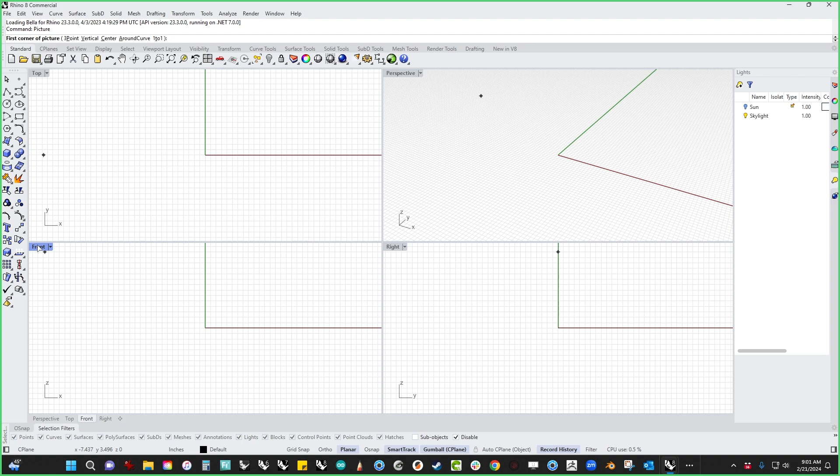So with everything that I build, if you see any of these videos along the way, we start with the picture command, and we're going to find the little sketch, and I'll work in the front view, and I'm just going to click and drag and drop this picture in the front view. And this is a sketch I did just a few minutes ago.

And what we're going to do is build this little character, and he's a little mini figure for a building set. And one of the things that bugs me about the existing things for some of these building sets is that the guys don't have any knees. So we're going to talk about how to put knees in this guy. And we might do arm articulation too. I don't know. We'll take a look at it and see if that's even mildly feasible. But if not, we're going to build a few little accessories and then talk about how to put this together.

And this character is actually kind of interesting from a Rhino 8 point of view, because it is essentially just like a clinic in push-pull. So we're gonna go ahead and talk a lot about that. We'll also use a lot of the new gumball features; there's a wire cut feature that's new on gumball in 8. There's also some solid transformation tools that we'll talk about and stuff like that. So, all right, let's get started with this.

And I brought this picture in using the picture command, and the first thing I'm going to do is just drop that on a layer by right click, and then I'm going to say change object layer. And now this lives here. I'm going to double click. I'm going to change this name to image so I know that it's there.

And then we're going to go to the material stack, and if you don't have any of these tabs down, right click down here in an open space and use show panels. You can also do that from up here, Windows panels, and that will pop open those, and then you can dock them over here.

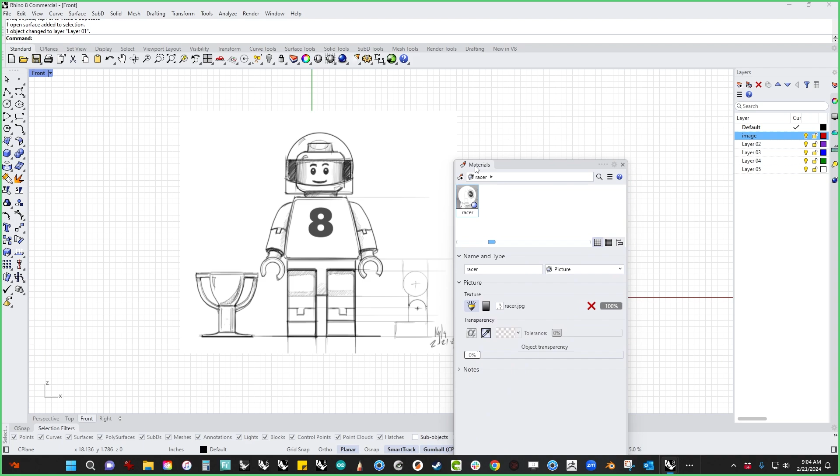If something pops up over here and it's not docked and you want it docked, and this is new for 8, if you grab it by the title bar, you can see that it will actually dock underneath the container that you had before. If you grab it by the tab, you can drag it over here and actually stick it inside another container, which allows it to stack.

So these are called containers now. The things inside are called panels, and then inside the panels can be toolbars. And so that's kind of the new way that this stuff is all organized, which is different from 7. All right, so let's take a look at this material.

So this picture frame material, this picture material comes in, and it actually creates its own material. And if we click on it, we've got some settings in here, and you can see that it's a picture material. And I'm just going to crank the transparency up a little bit so that it fades so that I can draw over it. I'm going to go back to the layer stack, and I'm just going to lock this guy. And now he's locked.

Actually, I'm going to unlock him. I'm going to center him up a little bit because this is a symmetrical dude. So I'm going to try and stick him right over the origin to make my life a little easier. I'm going to nudge him just a little bit using arrow keys, and that's mildly centered, so we'll just go ahead and drop that.

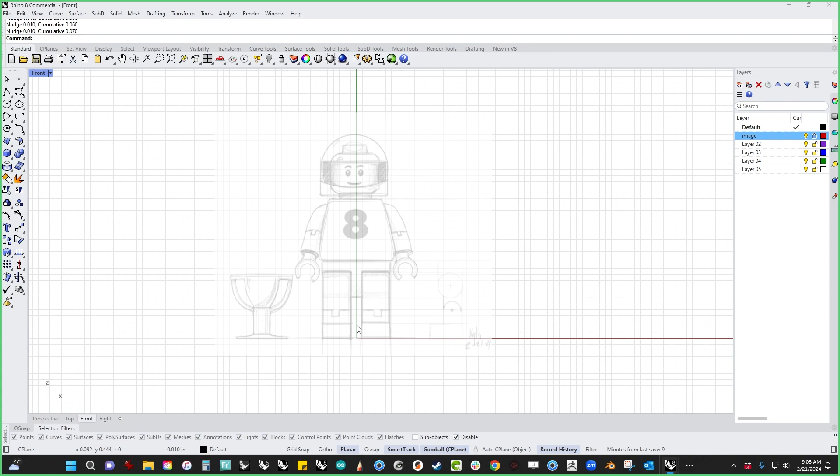Now, this guy, if we look at it, it's actually pretty simple, and the crux of this build is going to be the articulation on the knees and making sure that that actually works. And so what we're going to do is let's start with the lower body, and let's do the hard stuff first, and then we'll do the fun stuff later.

So I don't have any dimensions on this, and so I'm going to just guess. I'm not even going to try and throw dimensions on it. If you were going to build this to integrate with your own building system, no matter what it is, you would obviously take some time to figure out what the units are for all that kind of stuff. But for this demo, I'm not even going to worry about it. So I'm not going to do anything other than show the build.

So let's start with an object that's centered, and I'm going to just start with a center rectangle. I'm going to go to 0, and I'm just going to drag out a box, and that is going to be kind of the gatekeeper for my symmetry and kind of the foundation of what I'm going to build off of. And I like this for 2 reasons. One, because center boxes are easy. The other thing is, with the O-snaps on, they have midpoints and quads and edges and all that kind of stuff that are easy to snap from.

So I can easily go from the midpoint, and I can drop a line down here, and I know that that's the center of my object. The other thing is I can take this, copy paste, and I can click on this and hit 90, and then I know I've got exactly centered for the centerpiece here. I can shift control drag to sub-object select, move this down. So I've got this little T shape, and yeah, sure, I could have come up here and drawn this with a polyline, but then I would have had to pay attention to symmetry and all that kind of stuff.

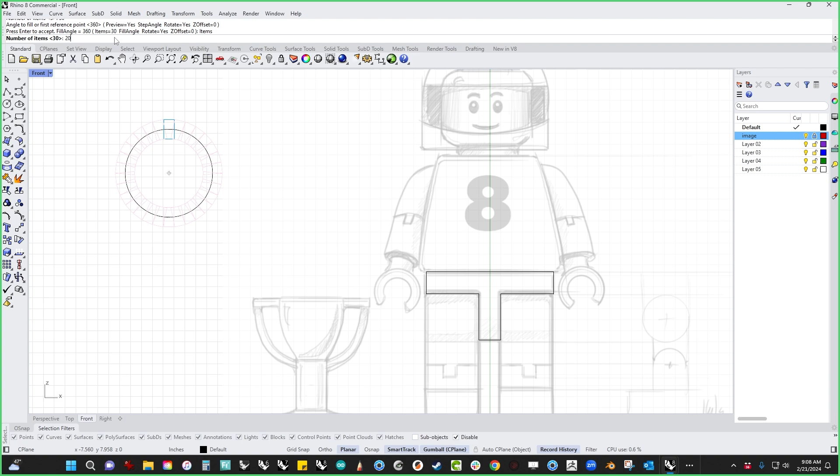Now, if we were going to do this normally, we'd have to trim. It would make us crazy, right? If we just do curve Boolean, I can either click outside and get the trace of the outside, or I can click inside and get the trace of the inside. And in this case, I want the outside. I'm going to delete all. Boop. 2 clicks, we get a gear, right? So this works for all sorts of curve stuff, and I just really want to show that every time because it's an amazing tool, and I'm always stunned at how few people actually know it exists.

So the other thing that I need to do is, because I don't have a depth dimension on this and I only have this front view, I need to kind of determine a depth.

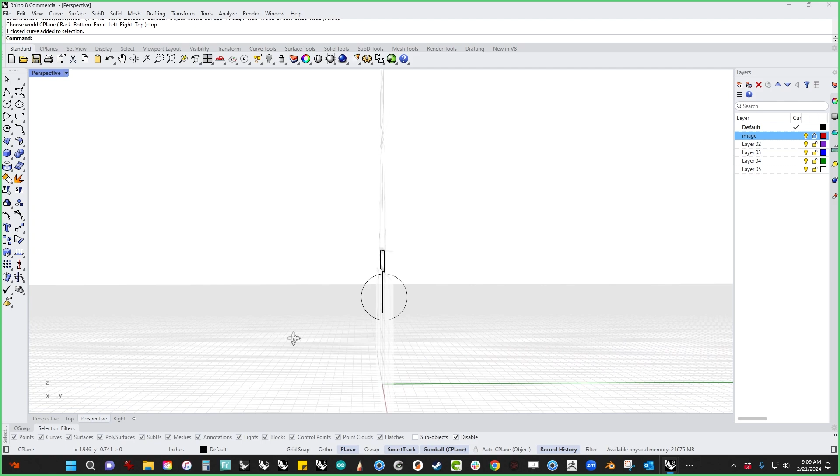And I do have a little section on the leg here, which is determined by this kind of barrel right here. And so I'm going to do a little mystery science theater modeling here, where I come up here and I'm going to just say, okay, that's about the top, that's about the bottom, right? And then if I go to the perspective view, I can click on this and I can rotate it 90 in the Z, and that's going to essentially be my depth, right? Because I don't want it to be too much deeper than that.

So what I can do is I can grab this guy and I can use gumball and I can snap it to this quad. And one of the settings that allows you to do that, if you right click in this menu ball, is this snappy dragging. And I use this all the time. I wish it was the default, but I think the default is smooth dragging. But snappy dragging allows it to respond to O-snaps. And the reason I like that is because I can drag this around in space and I can find things to snap it to. So I know that this point, because it's flat, is aligned with this quad on this thing. So I know that that thickness is correct.

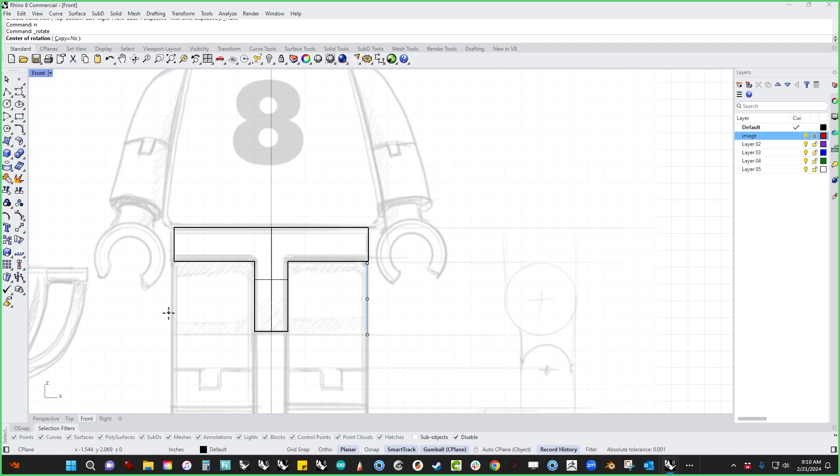And then if I grab this little menu ball down here, or this little extrude ball, I can extrude forward with O-snap, and I can snap that to the front of this. And I know that the thickness and the width of this are going to match. And I'm going to go to the right view and hope that it doesn't make me a liar. And we can see that these match. Okay? It's almost like I know what I'm doing.

All right, so then we're going to just take this barrel, or this circle, and I'm going to use the extrude dot to come out here like that, and I'm going to snap it to that, and I know that that fits right in there, right? So I'm snapping to the midpoint on this. And my edges don't align here, so I'm actually gonna shift control click this face, go to the front view. I'm gonna grab gumball, and I'm gonna use my O-snap to snap that to the end snap there. And because I'm constrained in the Z direction at this point, I know that it's only gonna go up and down, and then I know that everything is now starting to line up, right? So we're sailing here, right?

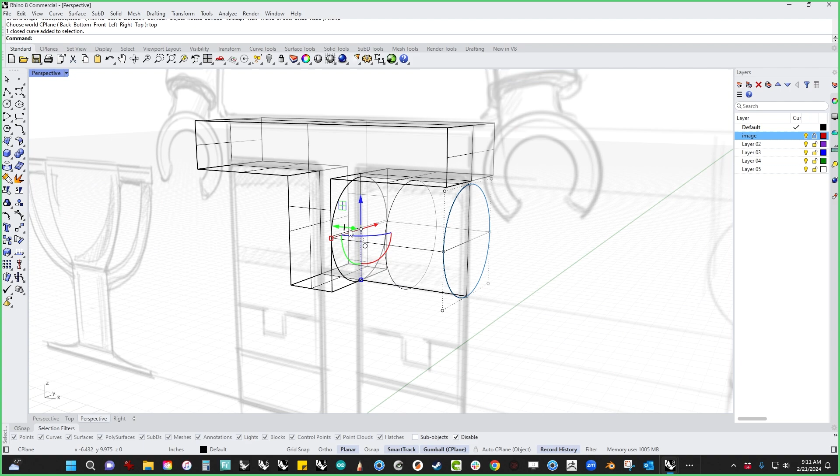And so now one of the things that I want to do is I don't want these edges on this. And what I can do is I can take this curve, which is what I used originally to make this thing, and I can move it off here like, nope, got history on it. So let's kill history. I've got a command set up for purge history, so I'm just going to move that off there, and then that can move independently. So I want this now to cut through that, but if I just shoot it through, I'm going to take a circle out of this, and I don't want that.

So I'm actually going to modify this, and I'm going to snap to the quad there, and then I'm going to snap to this quad here, and I'm going to use these two and trim the top off. Then I'm going to take this and join it. Now I'm going to use this cutter. And this is where the fun begins. So I'm going to hide this. And this cutter will go through everything it touches. So I'm going to grab this new little icon right here, and I'm going to just zing that through, and it cuts the bottom off. Okay? So it's like this wire cut that's built into Gumball, which I think is fabulous.

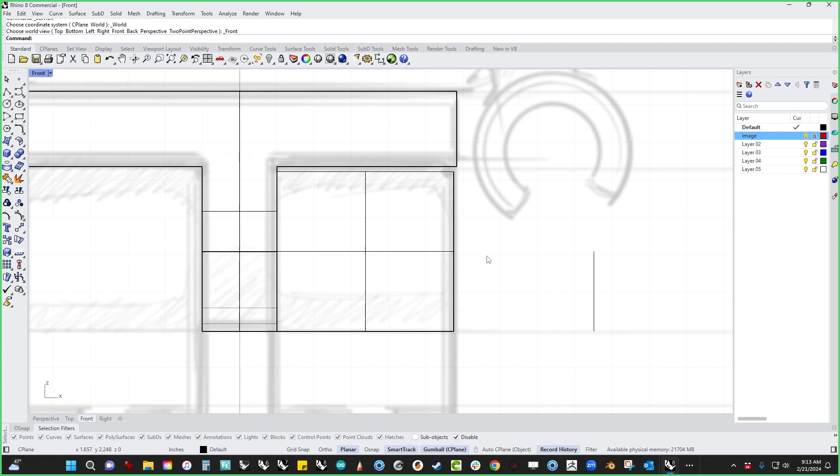That's essentially what our articulation setup is. And so if we were going to 3D print this or do anything like that, we may want to build a little bit of clearance in here. So I'm going to actually pick this thing. I'm going to double click the origin of the gumball, and I'm going to use O-snap to bring it over here, because you're going to see this little mismatch right here. I'm going to actually move that using O-snap so that that lines up, but it's also giving me just a tiny bit of clearance in here.

Okay, so I've built a little bit of clearance in here. If I was going to go 3D print this later or something like that, I would end up with something that would actually work.

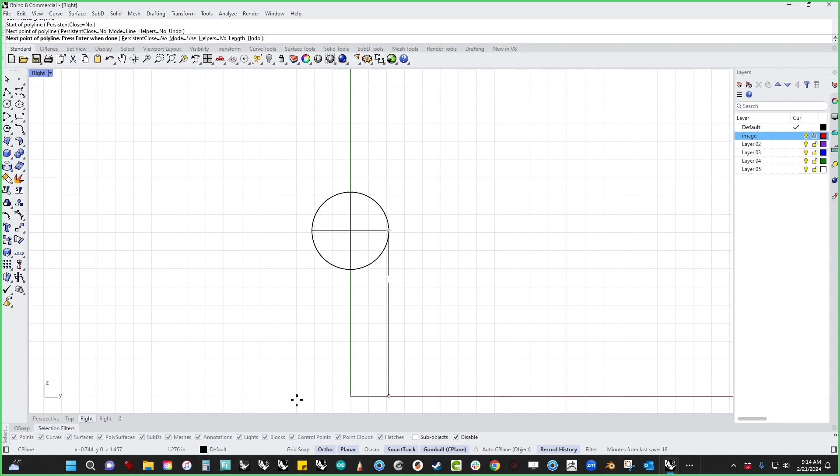So let's go to the right view, and this is our front, if I'm oriented correctly in my head. We're going to build the legs on this thing going forward. I'm going to isolate just this guy, go to the right, and let's draw the legs out. I'm going to snap to the quad, draw down to here. I can use a grid snap if I wanted to really be precise. Let's give him a decent foot so he doesn't fall over, something like that. And then I don't know how high this is supposed to be.

So I'm going to just come up here and snap there, and let's go back to the right view. And then I'm going to come up here and say, probably something like that, feels kind of footy, right? Somewhere in there. I don't want to come all the way up here, maybe just a little bit. This is a lot of eyeball science at this point, but that's how we're going to roll for today.

So now I'm going to take this, and I can use this extrude dot, and I can just use O snap to drag that out, and I've got the basis for my object.

Now, somebody's going to hit the comments and be like, you just draw the whole thing and extrude it out. Yeah, exactly, we could have done that. But I like this way because I like doing things in chunks so that everything lines up and all that kind of stuff. So you do you, that's fine, but this is kind of how I'm going to roll.

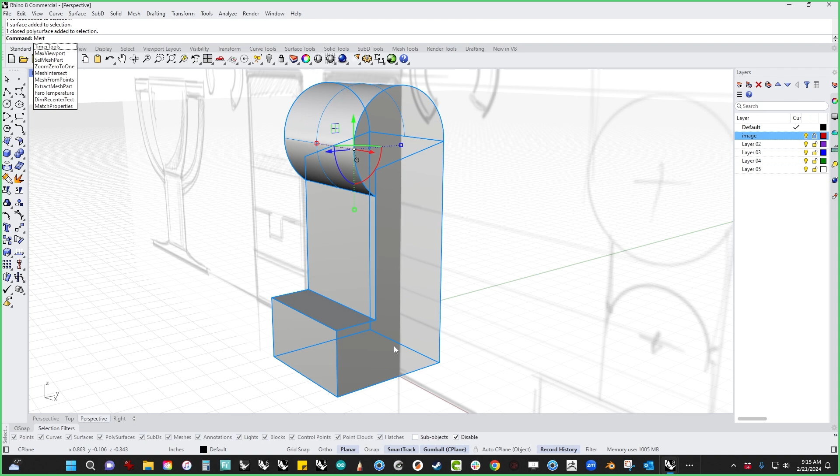We're going to go ahead and Boolean these guys together. And you can see that there's a little discontinuity on this surface. I'm going to fix that with a command called merge all coplanar faces. Boop, and then it's going to merge all that stuff up. So anything that's planar, that's got a split in it, it's going to remove the split. You can see that this curve is now just kind of incidental at this point, so I'm going to get rid of it. And we've got our leg.

Now let's look at this lower leg articulation. This articulation style is very common in any kind of action figure build or anything like that. So what we want to do is we need to build what's called a T-slot in order for it to be able to rotate, but it has to rotate around a circle.

So let's go to the right, let's figure out where that circle is going to be. I'm going to use a 2-point circle for that, and I'm just going to snap from edge to edge. I'm not even going to worry about where the placement is, I'm just going to place it in space so that it's located about there. Now you can see where the center of the circle is, right, by the arrow. So I'm just going to drag that up until it vaguely lines up with the sketch.

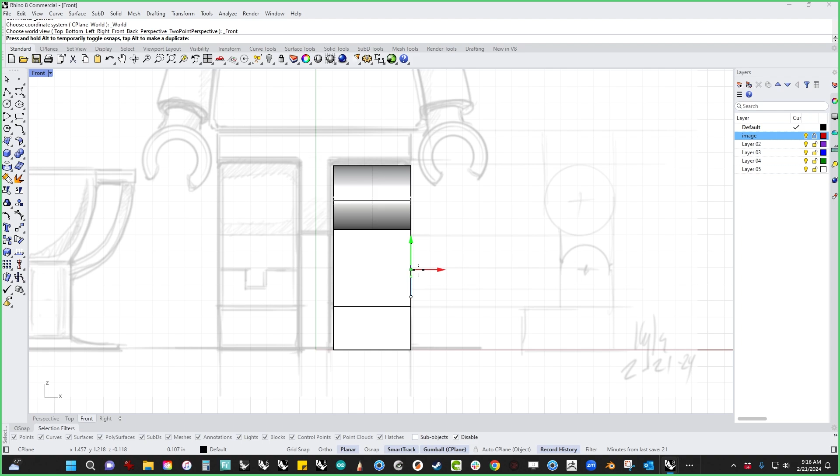And I always say when you've got a sketch, especially one that I've drawn, to use it as a guideline and not a law. You need to look at it, because you can lie, cheat, and steal in a sketch. The model is where all of those lying, cheating, and stealings become available for view. So we want to make sure that we are being honest about how this thing is going to go. Now, I have the knee drawn with the circle part on the exterior, which is fine, I think that's okay.

So what I'm going to do is I'm actually going to split this thing in half using this cut. I'm just going to run this through there, and it made a hole, which is not necessarily what I wanted. So what I want to do instead is the same thing I did before, where I want to make this into a cutter, and I'm going to just split this in half like this.

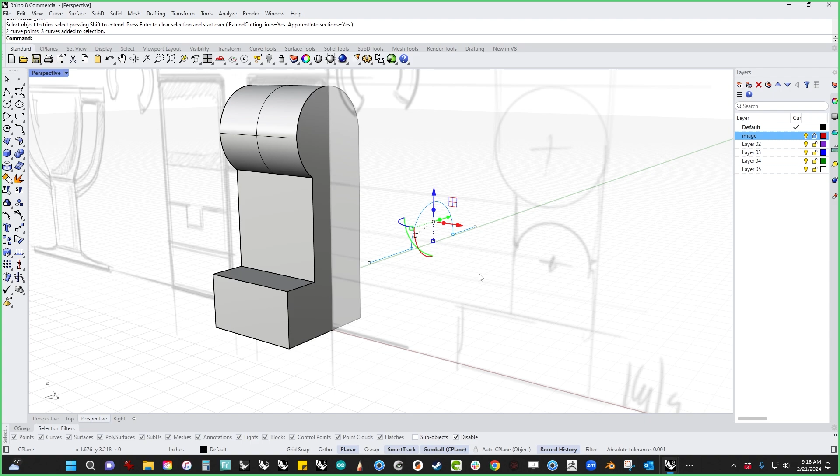I'm going to join that, and use this as a cutter, and just slice that through there. The cool thing about this is now it has a center point available, which means if I set my gumball to that point, I can use this and rotate it.

I can see what this is going to do. Right now we can already see that if we go into a 90-degree position, he's going to kick himself in the center parts, so to keep it from being rude, I'm going to Control Shift drag this face and just move it.

Now that's clearanced, and it's going to work. So I know the foot is going to actually work, but I need to make sure I have some clearance. So let's undo, let's do this, let's redo that, let's go back to the front view.

Any questions so far? Everybody still with me? I'm going to just use the Shift key to spin that down. Question? Okay, feel free to jump in, feel free to hit the chat.

Is there any way of enlarging your screen? That is as big as the screen is going to go, that's full screen for me.

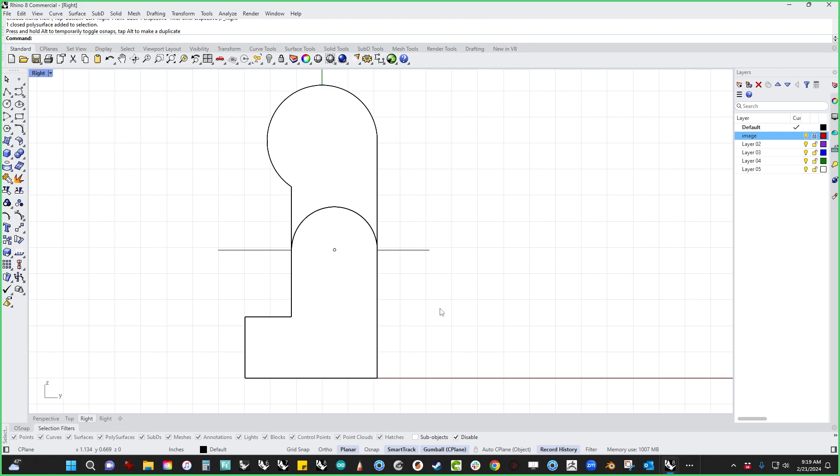So this guy is essentially going to be the outsides of my T-slot, and I'm going to isolate that. This is going to have a slot dug out of it, so I'm going to start up here.

Let's do the same trick as before, start with a center since I know there's a center point right here, and drag a box out, we'll call it something like that. If I was doing this for a client, I'd go through and measure all this stuff, but we don't have time for that here. So I'm going to take that and zing it through and cut it.

That's going to make my cut. So now I bring everything back, and I need to actually keep that piece, because it needs to go with the top. Let's undo that, and let's take that, because I want to keep that piece.

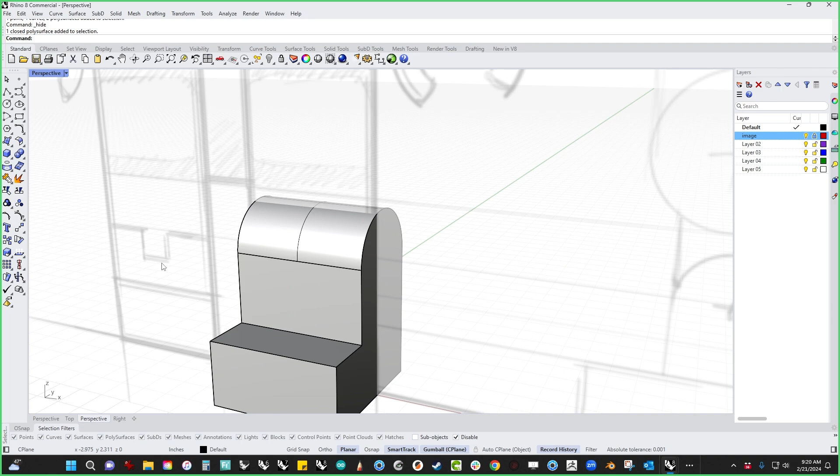So let's do this and this, isolate that, and let's split this actually. Let's do a wire cut, but we're going to keep this. This is a situation where we want to use the wire cut command, so we're going to cut through here, cut this object, go all the way through it, and we are going to keep all.

Now, the thing about keeping all—oh, they fixed that. It used to be that it would make a copy of the old thing, which wasn't necessarily what you wanted, so that was a bit of a problem. But it looks like that's working now. The keep all just keeps the individual pieces, so that's going to work.

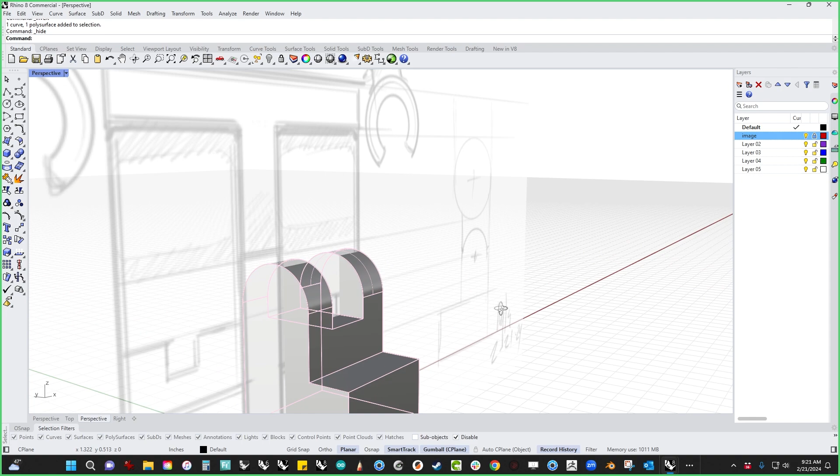This is pretty much what we need to do, except we actually need a circle at the bottom of this in order for that to be able to spin. So I'm going to do the same thing again, a 2-point circle, and snap it edge to edge. And it looks like it's, there we go.

Then I'm going to cut from that side to this side, and it's going to dig that out. See that? This is all just gumball. We haven't used any tools out of here, right? We've used the box and gumball and a couple of circles, and we're sailing here.

So now I'm going to take this, make it just a little bit smaller so that we have some clearance, and then I'm going to extrude it, and that's going to make the plug that I'm going to add to the leg.

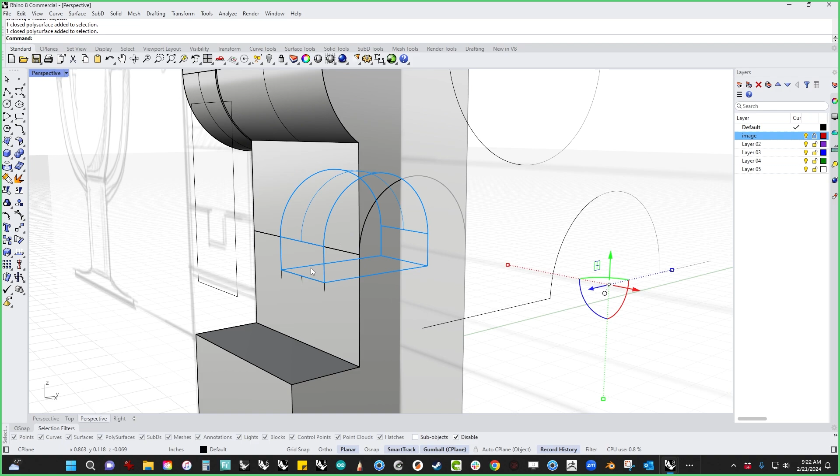To go up here like this. Now, I've made myself a little bit of a mess here, so let's fix that. I'm going to Control-Shift-Click-Delete, open that up, and use an edge surf, and just put that back together: join, cap, merge all coplanar faces, and now we're kind of back in business.

Now this guy, it's great that he's set up like this, but I don't like this little gap in here. So let's fix that, using a midpoint snap, and I'm going to draw up like this using Smart Track to line that up, and draw a box in there. I'll take that box and extrude using O-snap.

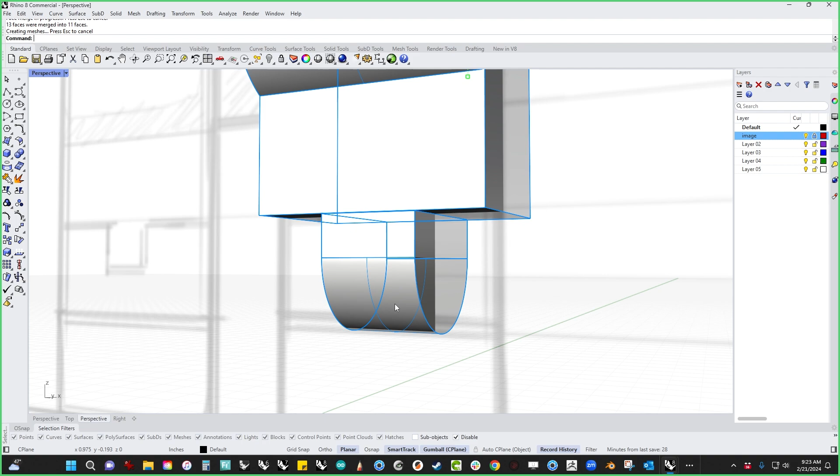Boolean these together. Boolean this together. Merge all coplanar faces, and I've got the basics.

Now let's take a look and see what we did. So I jumped the gun a little bit here. I actually needed that opening, but I think I want a little bit of clearance in it. So what I'm going to do is grab this, set my gumball here, and then scale it, holding down Shift just a little bit. Now I've got a little bit of clearance in there.

So now I can take this, and let's isolate those two, and cut snapping to there, and it didn't do it. So it needed to go all the way through. So what I'm going to do is actually make myself a little Boolean cutter, and I'm going to do that by just adding some pieces in here.

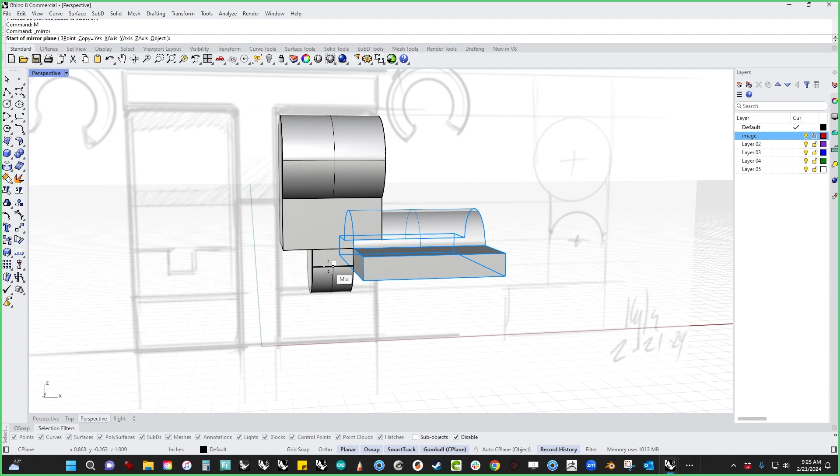And let's go to the right view. I'm going to join this, and then do a little extrusion, and then mirror this. And I've got those things the way I want them.

So now I'm just going to do a Boolean subtract on these, and that should have gotten rid of all that stuff.

All right, now I've got a little step here. Maybe I want to get rid of that, maybe I don't. If I do, I can just draw a little line and cut that. In fact, let's do that.

I don't like that little step in there. It goes from here to here. So let's take that and just zing that off.

And let's do the same thing on the back. We're just using the cut command on the gumball to do that.

You see how few tools I'm using? This is really kind of luxurious to be able to just sail through this stuff.

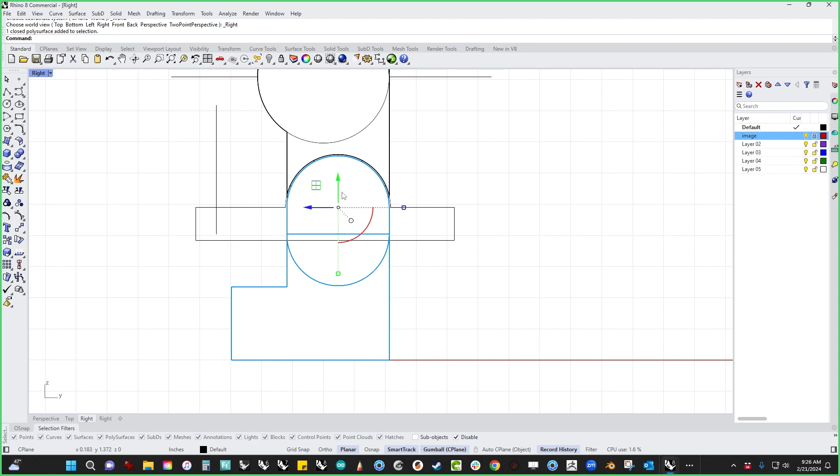Now, if I test this, if I go to the right-hand view, and if my gumball is still set on the rotational center, but if it wasn't, I could certainly just change it to that. But now I can see that he makes a 90-degree turn, and he's kind of colliding with the front of this thing. So let's fix that.

So let's just drag from here to here. We're going to make a cut out of that. I'm going to put this back where I found it. Come now, this way. There we go. And let's fix that part.

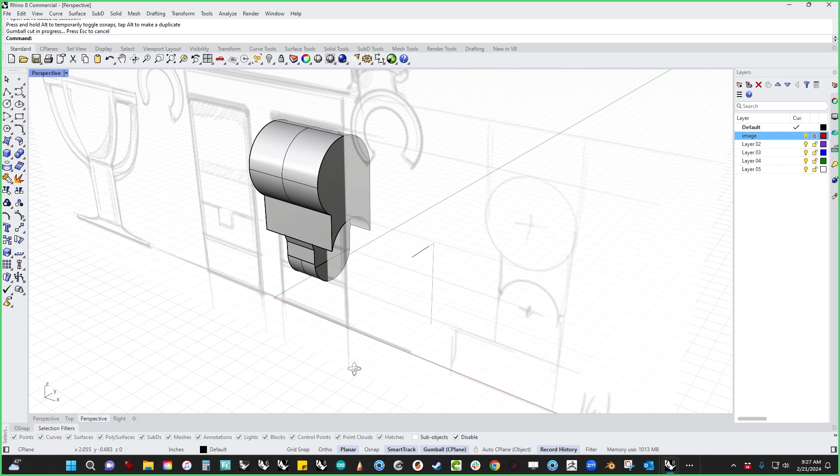Now, some of you might be much better at strategically doing this kind of stuff and think a lot farther through it. I tend to be a kind of put my face against the stove type of person to see whether it's hot, and I kind of end up finding the way along the way. It's just kind of the way I've always worked. And so if that's not your style, then so be it. I encourage you to find your own best path.

All right, now it doesn't like partial cuts. Actually, it did because it's a closed object. Okay, fine, look, we're learning together. I'm going to stick this here, and then just bring that out like that. Now, if we rotate, now we can sit. Hooray.

All right, the last thing we would do is put a pin through here, and I might clean this up a little bit. I might look at this and say, maybe I don't like this transition. We can always adjust that or do whatever we want. But I think for now I'm going to just let that roll.

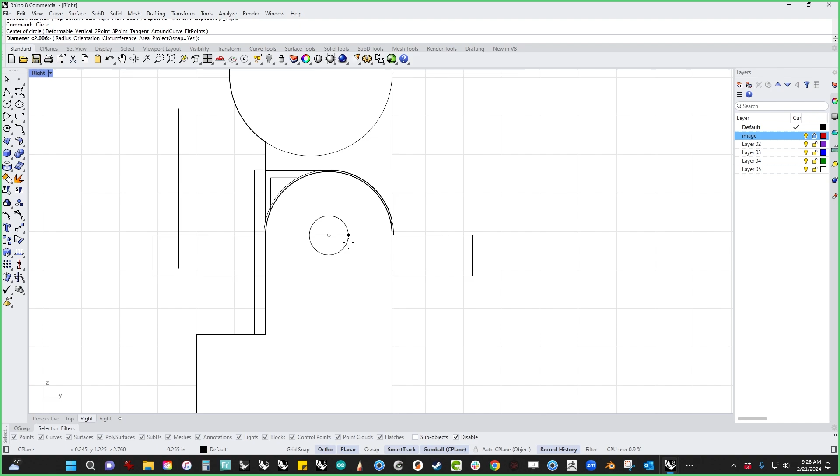So the last thing we would do is put a pin through here so we could actually articulate this guy. I'm just going to pick a random size, not worried about that. I'll use this cutter and shoot that through, and it's going to cut everything it finds. So anything it hits, it's going to cut. Just keep that in mind.

I'm going to shrink this just a little bit, and then use this to make a pin. Then I'm going to Control-Shift-Click, drag, snap it there, Control-Shift-Click that face, drag, snap it there.

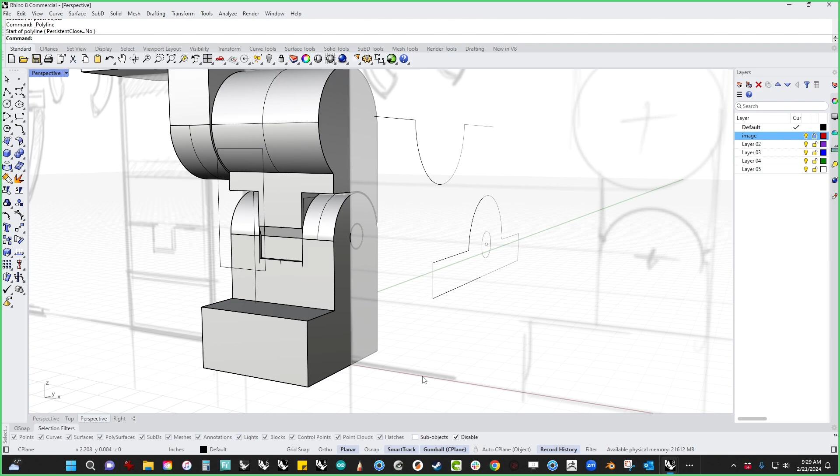Now, if you're trying to follow along and your O-snap isn't working, I run all my O-snaps checked, but I run them disabled. The reason is the Alt key is the toggle for enable/disable, and that lets me cruise around the scene. If I don't disable this, it's always trying to figure out where it's going to snap, and that drives me crazy. So I prefer running them disabled so I can hold Alt and light them up when I need them, but they're not lit up when I don't.

So if there's a disconnect between how I'm doing things and how you're doing things, that might be the difference. This guy's pretty good. He needs an articulation point at the hip, so let's throw that in. And we've got a center snap, so I'll place that there. It's going to remember the last diameter of the circle I used, so I'll start dragging the circle and then right-click.

How are you switching back and forth between views so quickly? I actually have hotkeys set up for that.

In the options, aliases, I have all of my views set up. So F equals front, R equals right, T equals top. I have a back, and I even have a bottom somewhere. But that's how I'm doing that.

So the way aliases work in Rhino, every command shows up in the command line. If I pick, say, a circle, in the command line that is the command — it says command circle. So if I want to make an alias for circle, I go to tools, options, aliases, and make a new one. Let's call it CR. It can be anything, you can even type a word if you want.

You'll notice a lot of mine are repeated, and the reason is S is one thing, SS is another thing, SSS is another thing. I like repeated keys because I don't like stretching my hand. Anything that makes your pinky and thumb go in opposite directions is a recipe for repetitive strain injury if you do this for a living. Ask me how I know.

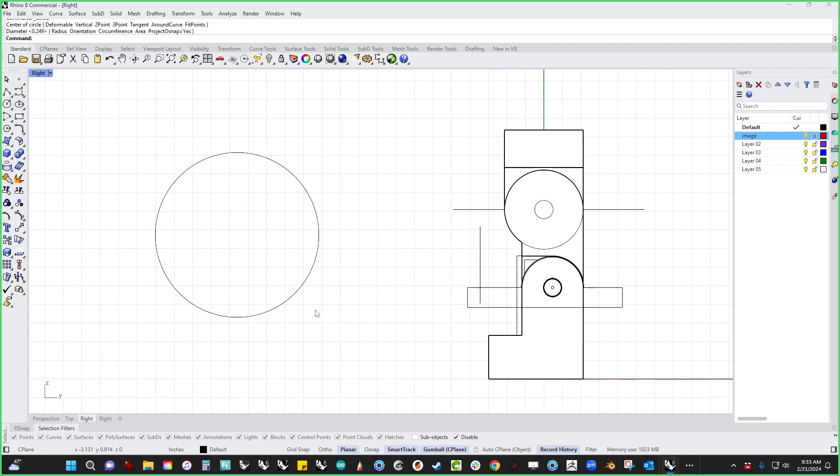All right, we'll paste that there. It's a circle — CR, enter, now circle shows up. The thing with aliases is they always require an enter, so it's not a single hotkey, it's a hotkey plus an enter, which is a right click on the mouse, a tap on the space bar, or the enter key. I use right click, so it's really fast. That's how I'm changing views quickly, and that's how to set up an alias.

All right, let's go back to this guy. I'm going to use the cutter and blow all the way through here, like that. I'm going to shrink this just a hair — and again, I should measure this — and run that all the way through. Then let's mirror this, and Control-Shift-Click.

Align it with the end. Control-Shift-Click the face. Align it with the end. Now, the reason that these sub-object transformations work is because this is all degree 1 geometry, meaning it's not degree 3 geometry, so it doesn't have any curvature built into it.

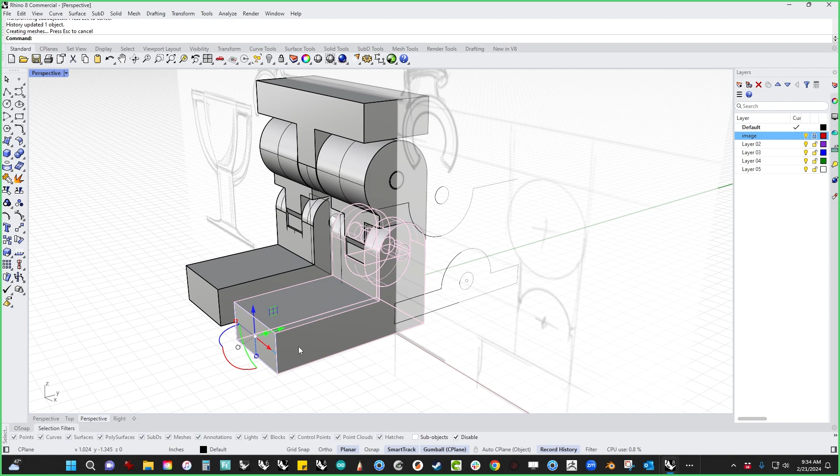So this whole system, as far as being able to shift, control, click, and move things, like if I want this face to be longer, I can pick it. That all works because this is all degree 1 geometry. It's very simple. It doesn't have curvature built into it. It will do it if it's got curvature built in, but sometimes you'll get some pretty significant distortion. But as it sits, this stuff works really well.

Now, in the spirit of lying, cheating, and stealing, let's grab a face here, and I'm going to start dragging it up, and then I'm going to tap the Alt key, and you'll see a little plus symbol. See that plus symbol next to my cursor? That means that it's making a copy of this face. So I'm going to bring this up just a hair, and I just broke that face off and made a copy of it.

I'm going to stretch this up. I'm going to go to my front view. I'm going to switch to wireframe. This is in my pop-up; that's how I'm switching to wireframe in and out pretty easily. And you can see that I'm a little bit off my sketch. So I'm going to scale this from the center. And I've got a couple of choices to make. I can either scale this out and then shift drag, select the top, and scale it in.

But you'll see that this actually has a little bit of curvature built into it. And that character line actually may be important for this dude. So let's actually overbuild this a little bit, and let's make it a little bit bigger. And then let's do, say, a 3-point curve, and let's add that curvature in. Let's assume that the designer wanted that. So I'm going to move this and mirror it both sides.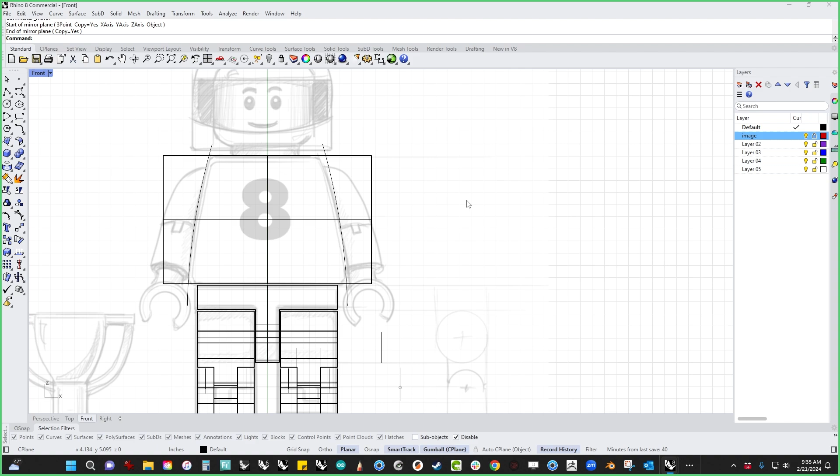The sketch isn't symmetrical, which is super awesome when people do that to you. And by people, I mean I did that to myself.

Let's grab these. Let's slide them forward, and then I'm going to just use the cutter. Shoot it through there. Cut those off. So now we've got the correct shape, as long as we're paying attention to this side of the sketch and not that side of the sketch. Pay no mind to this right side of the sketch. And we've got our body. And it looks like there's some fillets and stuff like that, and we'll deal with that a little bit later.

And maybe we want this to have a little bit of overhang so that he looks like his shirt is sticking out a little bit over his pants. Can play with that a little bit. Maybe there's some taper. I don't know if we want some taper in this guy or not. Maybe he's square. If we go to the right view and I shift control drag this, I can scale it and add that taper, but it doesn't have any curvature in the front. And maybe I want some curvature in the front, maybe I don't.

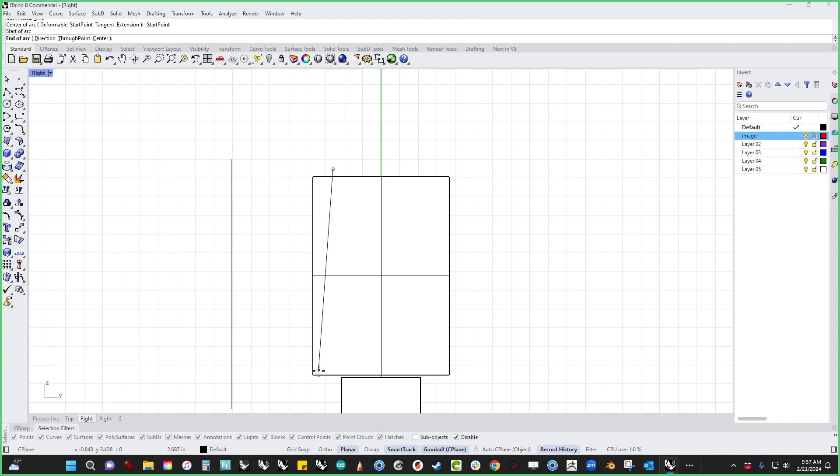If I do want curvature, maybe I'm going to pull this out. And we'll do the same thing again. Add a 3-point curve. Maybe something like that. Maybe he's a middle-aged race car driver.

Maybe he doesn't have time to get to the gym so much. Maybe he's got life responsibilities that he has to pay attention to.

Shoot those through, and we'll just cut these pieces off.

All right. I mean, he's 52. Who's he trying to impress? Maybe I've shared too much.

All right, let's go and add. I think I want this a little skinnier, so I'm just going to shift control drag. I'm going to bring that in. Now, because we are no longer doing degree 1 geometry here, look what happened. I don't know if you noticed that. I'm going to hide the image for a second so you can see it. See how we've got essentially a single span object through here.

If I scale this, look what happens. See how that surface rebuilds and we've got more spans in here? That's not necessarily a bad thing. You just have to be aware that it happens. Okay?

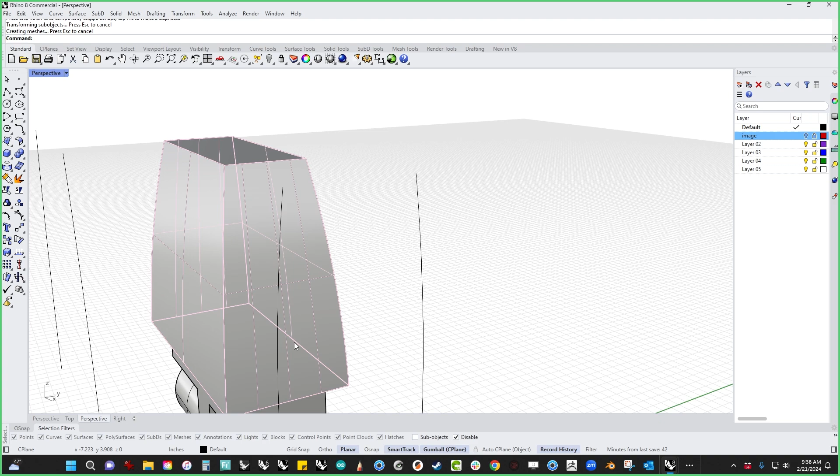And so if it's important for you to maintain that being single span, then you're going to need to delete that surface and remake it or rebuild it or do something. In this case, it really doesn't make that much difference, so I'm not going to sweat it, but it is something that you need to be aware of. If you do a sub-object selection, you do a sub-object transformation on a degree 3 object.

Does everybody know what I'm talking about when I say degree 1, degree 2, degree 3? Is anybody confused about that? Don't be embarrassed if you are. Just let me know and I'll side quest on it. If not, then we'll just keep rolling. Yes, you know what it is, or yes, you want me to explain it?

Explain. Okay. So when we talk about degree, and to be fair, so Craig, thank you for answering. I'm glad that somebody did, because I spent a lot of time in my career not knowing this until I was actually teaching a class with Pascal and he explained it, and I was like, I've been doing this 20 years, and I finally figured it out.

All right, so degree, when we talk about spans in a surface, right? A single span surface has one span to the top, one span to the bottom, right? Single span. These isoparams on the inside are spans. And the way spans are determined is it's the minimum structure of a curve to be able to get the shape you want.

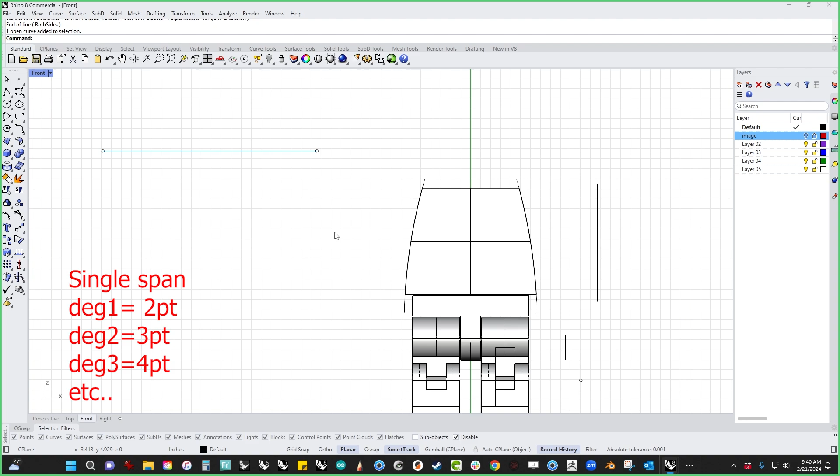So a degree 1 curve has 2 points. A degree 2 curve has 3 points. And that's if we're doing single span. And a degree 3 curve has 4 points. So it's degree plus 1 equals single span. So if I do a degree 3 curve and it's got 1, 2, 3, 4 points, and I have another

curve here, and I make a surface, and let's get this over here, and let's rotate that 90, and then let's mirror this. I'm just making a little single span rig here. Let's move this to that, and let's move this over there. There's probably an easier way to do that, but I was committed.

All right, so now if I make a surface out of this setup, it's got one span in it, right? One span that way, one span that way. That is a single span surface. Isn't this about the degree of curvature of the spline? Not necessarily. Let's keep it simple: when I talk about a degree 1 curve, that means it's got 2 points. A degree 2 curve has got 3 points, and a degree 3 curve has got 4 points. So it's degree plus 1 points.

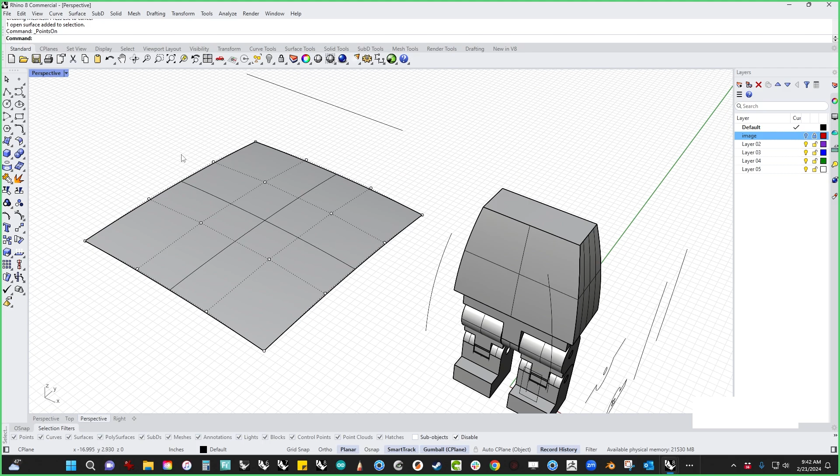And the result of this is going to be 4 points in that direction, 4 points in that direction. Now, the confusion comes from, you can have a degree 3 curve that has more than one span. So let's say, for instance, let's rebuild these two curves. They're going to be degree 3, but let's make them have 6 points. And like that. All right, now if we make an edge surf out of this, you're going to see that it's going to have more than one span.

So this is no longer a single span surface. Okay, and that's the difference between what we had here, right? That's single span, and this, which is a multi-span. And so when you do that sub-object transformation on something that is degree 1, it can maintain that, right? So this is all degree 1, and if I move this, nothing happens. It doesn't rebuild. This, on the other hand, is not degree 1.

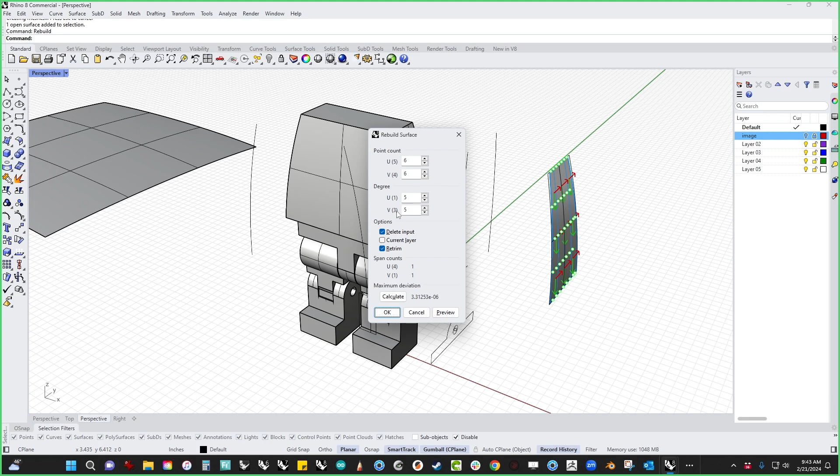In fact, if I break this surface off and I look at the stats on it, it's actually degree 1 in one direction, but it's degree 3 in the other. So that's why it's got one span down the center, and it's got more spans going this way.

So it had to rebuild. So it's not a big deal. It really doesn't make a big difference unless you're like psychotic about single span modeling. But if you want to be a single span modeler, it comes down to, you need to understand that your curve can only have one more point than the degree that it is called, right? So 1 has 2 points, 2 has 3 points, 3 has 4 points, and so on. Okay, if you have more points than that, it's now a multi-span curve, and you'll get a multi-span surface like this one.

All right, did I confuse everybody? Awesome. You can come back for the next video, and I'll try to make it more clear. Okay, fantastic. I feel like you're lying to me, but that's okay.

All right, so let's go back to this, and let's bring this back. And for the head, this is just a simple revolved surface. And one of the things about revolves is we need to know where the center point is. So I'm going to drop a center, and I'm going to just start drawing here, here, and I can use the mode switch. I can hit the M key and get a surface here, but I actually prefer to do this just all straight lines, and then go back and fillet it later.

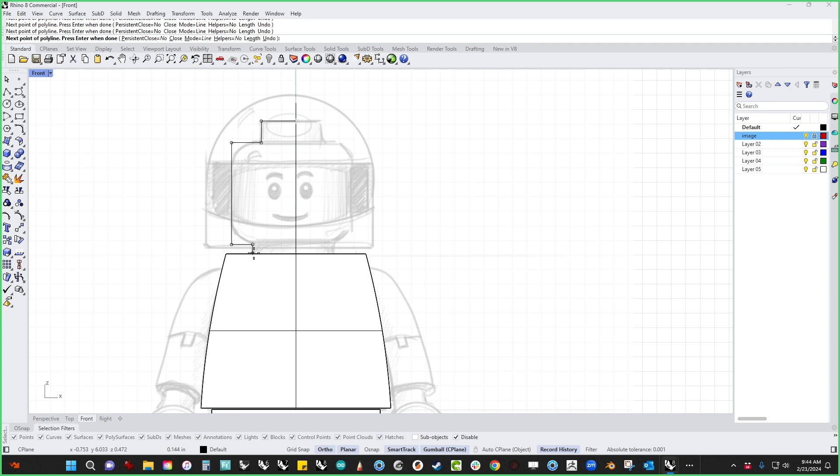So the M switches between straight lines and curved line segments, but I actually like doing this just straight and then going back and using fillets to get it, because I find it a little bit more kind of iterative, and I just, again, the way my brain works. Like, that's too small, so let's do 0.04 and 0.4. I have no idea how big this thing is, so got lucky. 0.4 looks like that's about right, so let's do it here. And it's too big to fit in there, so let's actually go down one. Maybe I should figure out what fits in the bottom first. Or actually, I like the 0.4 better.

So let's do this. I'm going to just move this in a little bit. I'm going to move it in, and then we'll figure out where the fillet fits, and then I'll move it back. I never said it was a good process. I said it was my process. So I'm going to just snap that to the end there. All right, and then let's take this and trim that off there and there. Join it up.

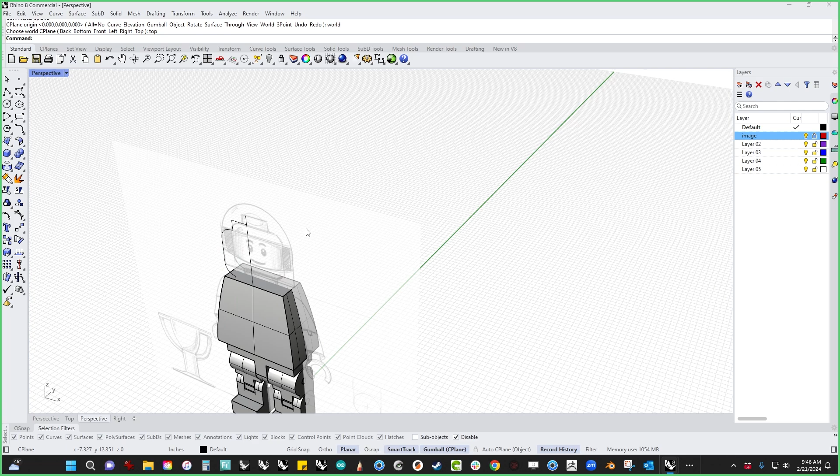And let's revolve that. I'm just going to take this. Let's make sure that it's flat first, and it is. It's also not centered in the middle of the object, so let's do that. I'm going to snap that to the center, and then let's revolve it. And we're going to just do a full revolve. And it looks like we kind of overshot on that piece. So maybe we go back to the original curve. And if we grab those 2 points and drag them in a little bit, that's going to update with history because I remembered to turn history on before I did any of this.

And anybody who's got any kind of engineering bent, I'm sure is just cringing when I just drag stuff. Like, whee! To be fair, if I was getting paid for this, I would measure things.

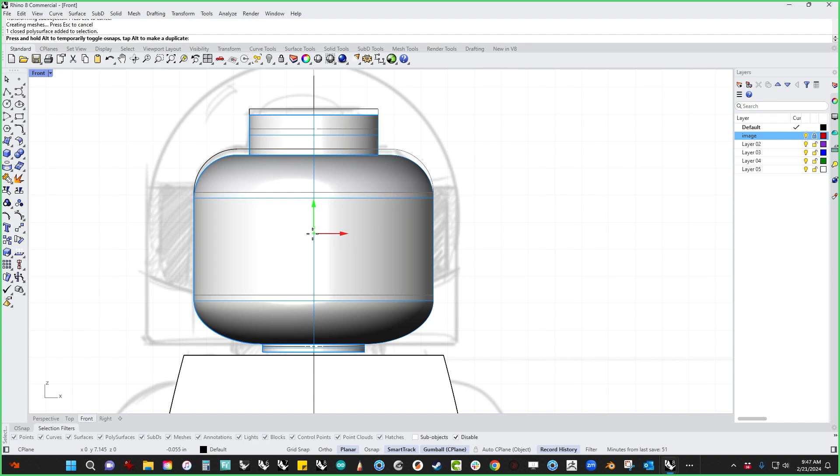So, all right. So let's call that good. Maybe that looks a little thick. Maybe let's push this down like that, and then let's stick him on like that. All right. So that's the head, and then how are we doing on time? 9:47. Oh, we're doing good.

All right, so let's make an arm. I'm going to do this with a control point curve, and I'm going to start way inside here, and then I'm going to come out, use 3 points for my shoulder, and then draw a straight line out here. And we're going to overbuild this significantly, and then come back and trim. And I'm going to use a pipe to make this. Just come down here, and that feels about right. Something like that.

And it kinked up here in the corner a little bit. That's fine. We'll go back and fix that later. I'll show you how to do that. But I'm going to switch to wireframe, and I'm going to grab the original curve and turn the points on for it. And I'm going to iterate just a little bit.

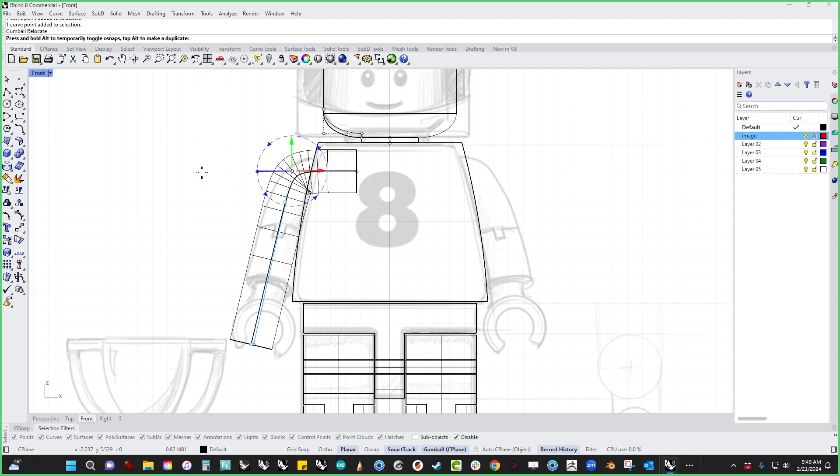I actually want to rotate this, and I'm going to double click to move gumball up here. This is a new thing for 8, by the way, to relocate the gumball by that double click. And when I first started using it, I was like offended that they had changed gumball, and now I absolutely love it. I'm just going to adjust that just a little hair, and then same thing up here. I'm going to grab these points and adjust this a little bit. I want to get that shoulder a little closer to the sketch.

And that's gonna kind of get it there. And that actually fixed our corner in here, but I actually wouldn't mind fixing that a little bit better. So let's isolate that and then use one of my other favorite tools, which is Move UVN. So let's explode this, and I'm going to pick this and turn the points on. And let's take a look and see what that kink looks like. And it's okay, actually. It's not awful, but it could be better.

So I'm going to just drag select all of these points, and then I'm going to run the Move UVN tool, which lives down here, by the way. It lives... Oh, now I'm going to make a fool out of myself because I always pick it from the command line. Where is it? All right, you get what you pay for. These are free.

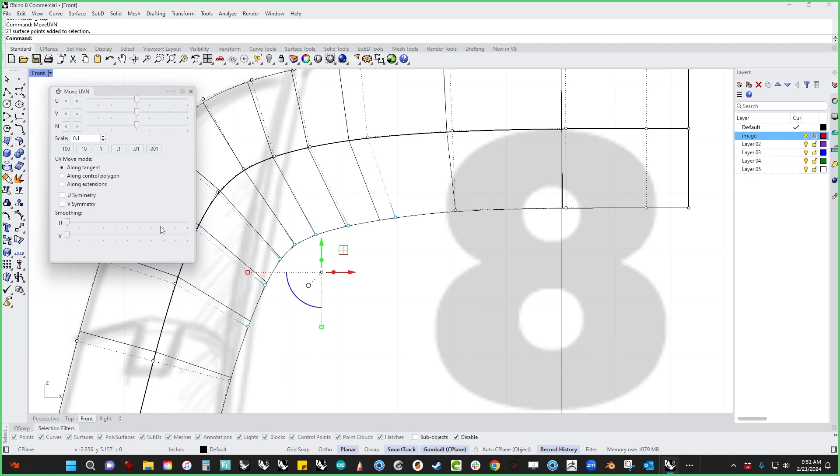So I'm going to pick these pieces. I'm going to pick the points that make up this pipe, and I'm going to just drag the U smooth. And look at how those just kind of redistribute a little bit. And it just modifies that just a little bit, smooths that out. I like that feeling of that curve better than the one before, so that's what I'm going to use.

If you had a pipe, for instance, that was really tortured, like let's do something really sharp and pipe that and make it big. This corner in here is always going to be problematic, and everybody does this and then ends up with a mess. If you take this and turn the points on, you can actually fix this with Move UVN.

If you grab all of the stuff in here, leave the end alone because you don't want to move that one. But if we grab all the way out to here and then we smooth this, look, we can just untie that. Now, is that the shape you want? I don't know, but you can untie that stuff. And then same thing in here. If you want to move this, you can redistribute those a little bit so they're a little smoother. Okay, I use this tool all the time for fixing garbage models that I make. So it's one of my favorite tools.

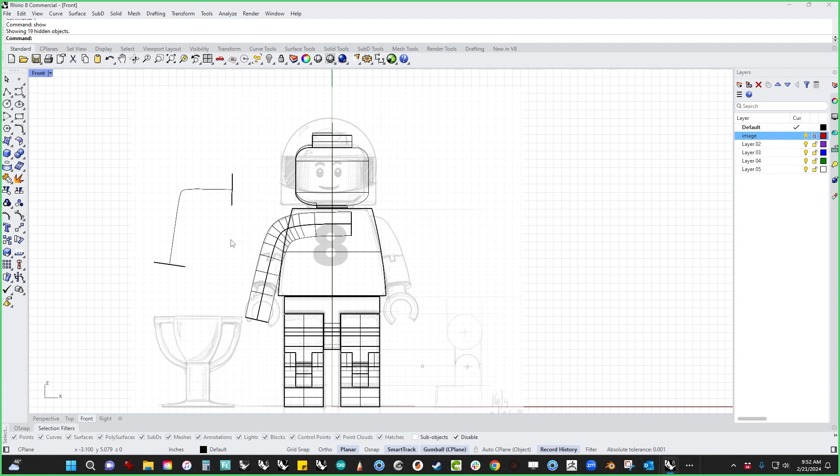All right, so we've got his arm, and we know that it does need to articulate against this, so that curve is something that we're going to need to work with. So I'm going to pick this curve. I'm going to start dragging it, tap Alt. That's going to break that curve off of that edge. And then I'm going to bring it back, and I'm going to stick it right very close, just a little bit of clearance. And then I'm going to isolate these guys. I've got a hotkey set up for isolate, by the way, if you're wondering how I'm doing that.

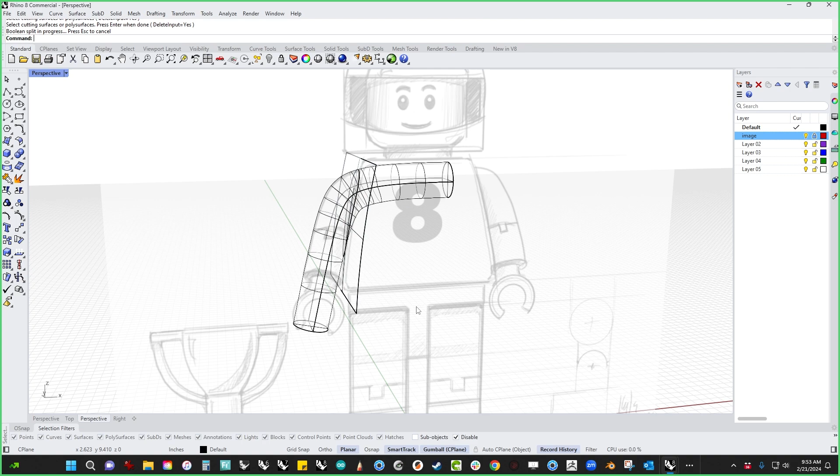And I'm going to take this, and the reason that it's not giving me a cut icon is because there's nothing for it to cut. This is an open surface, and open surfaces can't have the cut. If I close it, it should have given me the cut for that. It didn't. So I'm going to just extrude, and then I'll use a Boolean split. And that gives me

the arm. Now, it's definitely overshot down here, so I'm going to just simply draw a line, and this is oblique. The drawing is set up so that you can kind of see the end of it, but that's not really the way it would be drawn. So I'm going to just pull this over here like this, and then my cutter is showing. I'm going to hold down Shift and go in both directions, and that gives me the arm.

So let's do the hand, and let's have some fun here. I'm going to turn on Auto C-Plane, and I'm going to Control-Shift-Click this face, and you'll notice that what happens is that C-Plane just stuck to the end of my arm, and my gumball is located correctly to the normal of this face.

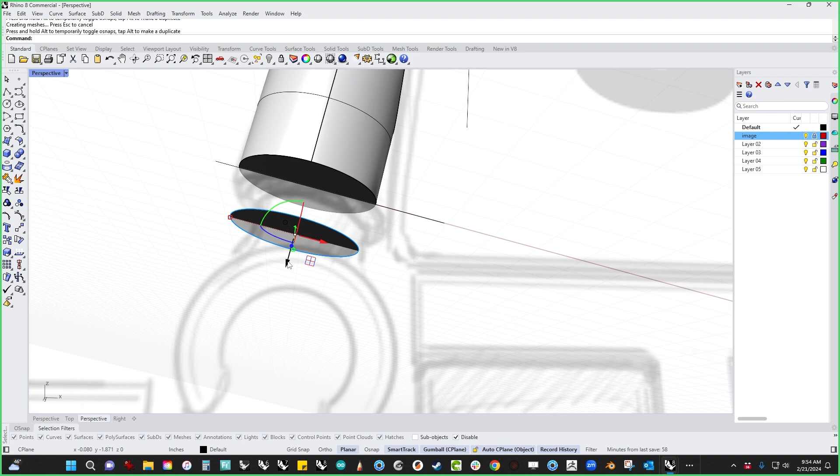So I'm going to drag, tap Alt, and that's going to make a copy. Shift drag for scale. I'm going to put it inside the model, and then I'm going to extrude it. That's going to give me that object. Now if I scale this, I can adjust it, and it's scaling correctly even though it's not oriented world XYZ. I find that to be super useful.

So now I can go back to the front view, and my hand is located a little bit weird. I'm going to do that just with a tube, and do it from the center. Obviously if we were doing this for real, we would measure this, but I'm going to just call it done, and then bring this and center it something like that.

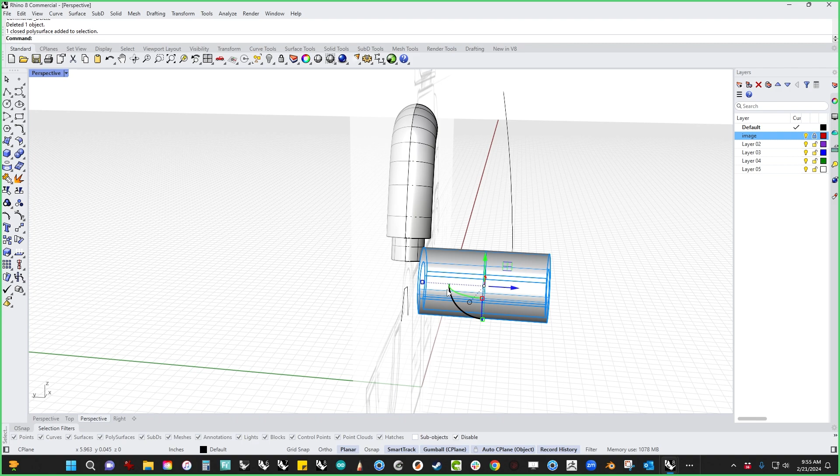Then we need to clip the grip part out, so I'm just going to come through here, draw that roughly, and use the cutter. This is obviously way too big, so we're just going to scale it. Use gumball to snap it to the center.

Take a look and see how we feel about the proportions. I think I want this to be a little bit deeper, like that. Then we can Boolean this up. I want to Boolean this out so that there's a gap in there. I want to make sure that my deletes are not on, so that I'm just making a hole, but I'm not getting rid of the part. And then I'm going to scale it in just a little bit for clearance.

Oh, history updated. Duh, I got to kill history. I have a hotkey set up to kill history because I find that sometimes it gets in the way. There we go. So now I've got my clearance in there, and it looks like it made a copy of it.

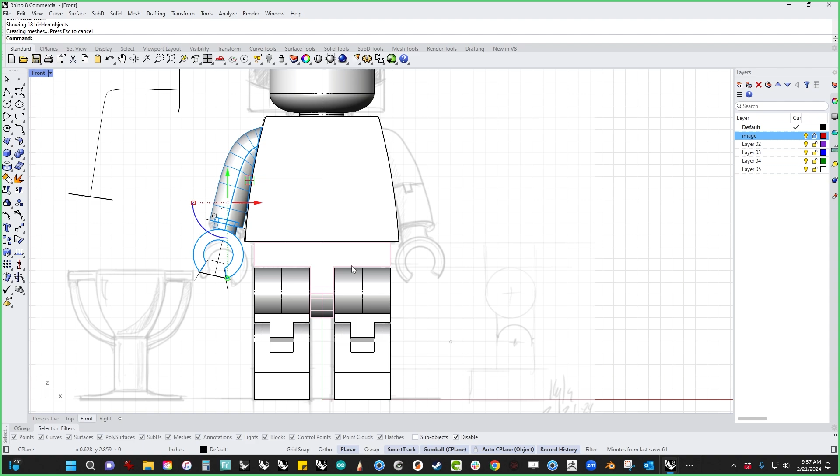There we go. All right, now to finish this up, I would probably go through and start doing some filleting and stuff like that, but I'm not going to get into that today because it's a little tedious and not super fun to watch. So I'm kind of doing big picture stuff. That gets that. We can get rid of these caps that we don't need anymore. And all that's left to do is build the little accessories.

So let's build the helmet. We can do that with a revolve. I'm going to just, again, start from my center line here, and let's draw this way. I'm going to hold down Shift, and then hold down Shift again. That's going to give me a really nice 3-point corner. And then I can adjust it. Something like that. Maybe we even go a little higher.

Something like that. And then let's go ahead and revolve that, going full revolve. This is an open surface, so let's cap it. And I want this to be a wall thickness part.

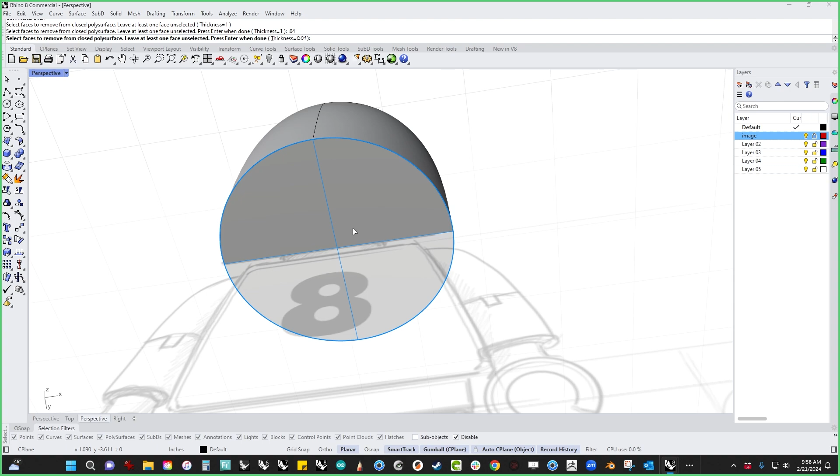So I'm going to isolate this, and we can do two things. We could have started with the inside surface and then offset it using a solid, or we can shell this. Shell will probably work in this instance. Let's do, I don't know what kind of wall thickness I'm talking, let's do 0.04 and see what it looks like. That's pretty thin, let's do 0.06.

And so the thickness in here, let's do that. Let's do 0.07, that's a little bit better.

Now, the one thing you'll notice is the inside surface on this is pretty complex, right? So the shell command works on simple stuff. If you've used shell before and found it to be sorely lacking, you're not alone. It is a tool that has significant limitations. On stuff like this, it's going to work pretty well.

On stuff like, something really complex, you'd probably need to go through the process of shelling it using shrink wrap, and there's actually a video on that on YouTube, Never Fail Shelling on Shrink Wrap. That would probably get you home. But in a case like this, it actually works. The inside surfaces on this are pretty complex, and that may or may not be what you want.

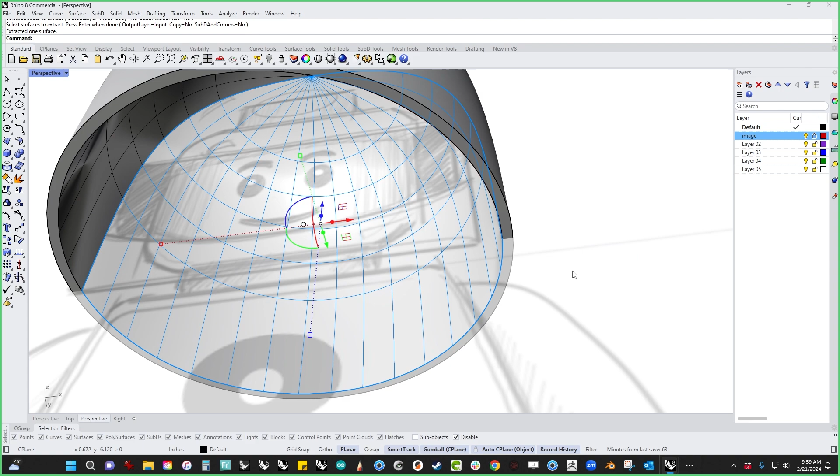If it's not, this is what I do. I actually pull this out and use it as a reference. Let's make sure this is all split up. What I'm going to do is copy paste and then shift drag till it is approximately the same diameter. You can see where the meshes start to overlap like that. That's a good indication that you're in good shape. So I'm going to get rid of the inside, this complex surface on the inside.

And that leaves me with a simple result. The problem with the simple result is these edges don't line up. So I'm just going to drag

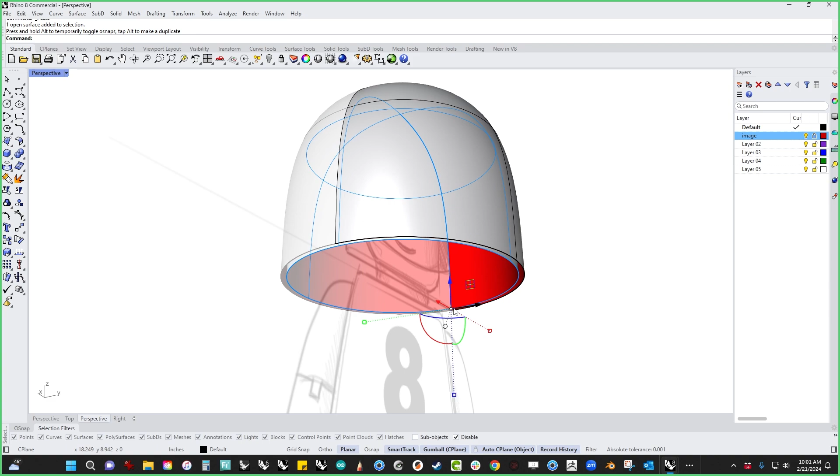That edge. Now you'll see what happened is it actually screwed that up. See that when I dragged it like that? So I think what I'm going to do instead is take this and allow this to not be a perfect offset. I'm going to just move this down so it matches, and let it be a little bit thicker at the top than at the bottom. I'm kind of okay with that in this particular instance.

So loft between these two. Join it up. That red you're seeing actually means there's a backside on this, which means we probably need to flip this guy and then join everything together. And then we've got a wall thickness part with simple surfaces in and out.

And let's bring our guy back. Let's go to wireframe. We want this helmet to snap on top, so I'm going to draw the little socket, and that can be fairly tight. We want that to be fairly tight, so I'm going to draw it actually line to line.

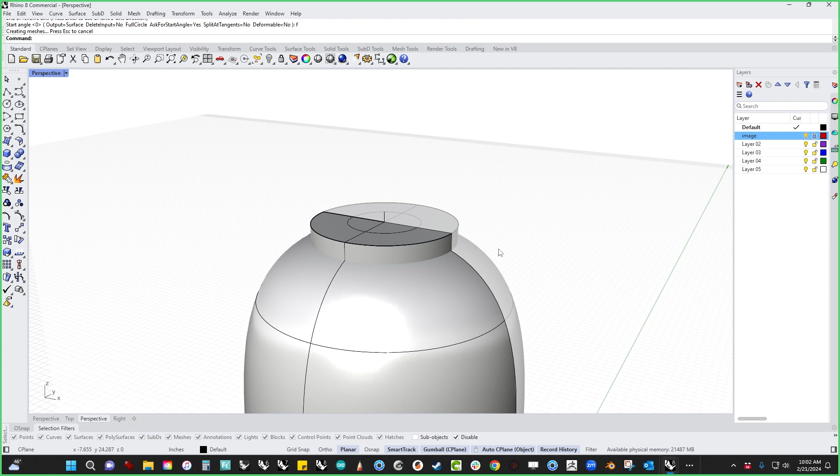Let's revolve this. This is the axle that it's going to go around. We're going to do it in full. Let's go to wireframe. I'm going to cheat, and I'm going to just hack this where it intersects, because I know that's a good spot for those two to Boolean.

So let's grab this and use the cutter. Now, I made a mistake. I left everything open, so it cut everything, which is not what I wanted. So let's just do these guys, and let's cut this. I'm going to shut Auto CPlane off because it's making my gumball go a little crazy.

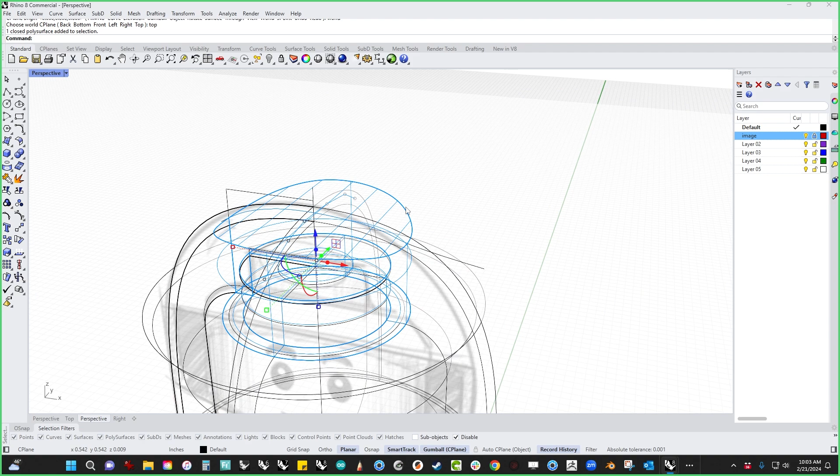Bring this back. Now it's still poking out a little bit, so let's hack at it from this direction. I'm going to do the same thing over here. Just knock this off. Holding down shift to go in both directions, and I'm just knocking the edges off this.

Now, could I have done a Boolean split and probably figured out how to do this without doing that? Sure, but then I wouldn't get to show off all the cool gumball stuff. And it looks like it's still poking through a little bit. So let's do what we should have done in the first place, which is a Boolean split to start with.

So I'm going to split this with that, and then I'm going to get rid of all the stuff that sticks out. And then we'll Boolean these two together and create that. All right, so that's going to snap on the top. So let's make the face the visor.

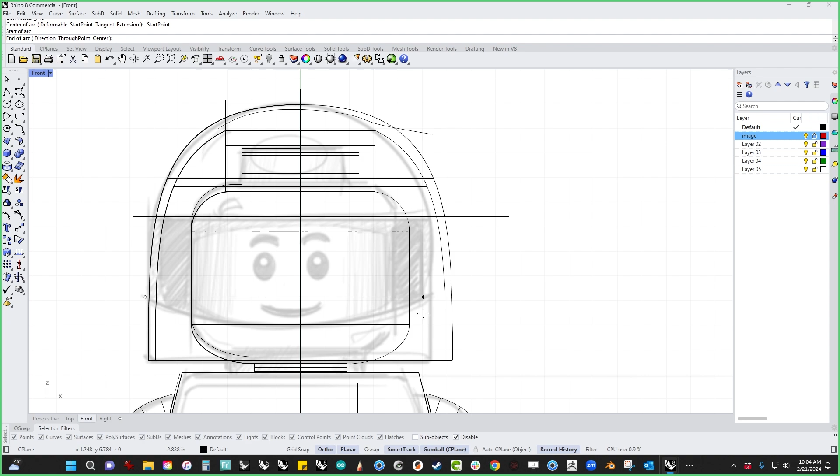And it looks like the visor kind of goes all the way. It's straight at the top, and it's arced at the bottom. So let's draw it how we see it first, and then we will modify it to figure out kind of how to make it land like that. So let's project these two onto the scene, or onto the helmet.

And let's take a look and see what we've got. Now, this is going to project all the way through, which isn't what we want. So what I'm going to do is take these projected curves, and then go to the front view. And I know that I kind of want my visor to do something like that. So I'm going to start kind of back here, and then I'm going to draw, and just snap it to those. And then I'm going to bring this out.

Now, because I snapped it, see how it got all wonky? I'm just going to click on this and scale to 0. And then let's project. And now I've got some curves that I can work with.

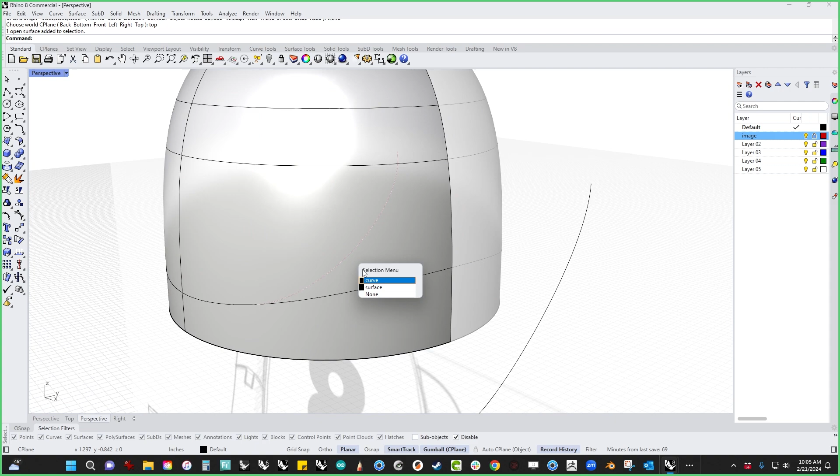So let's trim these curves. I'm going to trim that curve and that curve. And then let's clean them up just a little bit.

I'm going to use blend curve, which lives in here. And I'm going to blend from here to here. And because the ends overlap, it's getting confused. So I'm going to just drag the ends the way where I want them. Shift drag to adjust both the points.

And then I'm going to trim and join those. And that kind of gets me what I want. If I were to explode this curve, I could copy that part over.

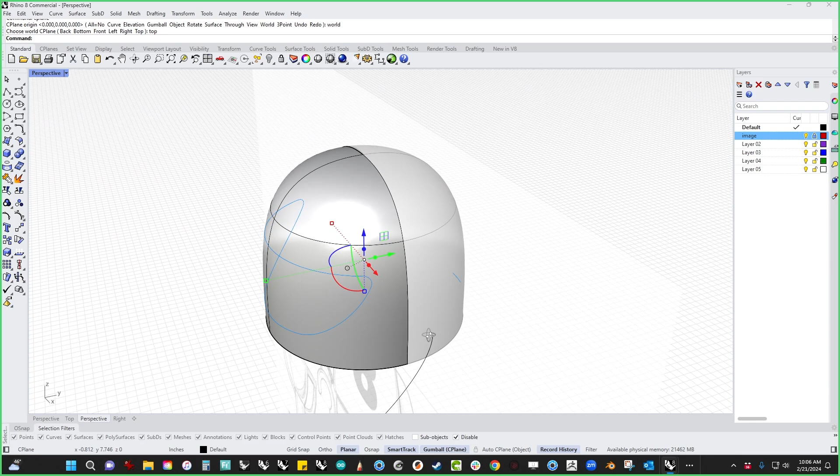Join this up, and now I've got essentially what I want as far as the faceplate. Now, a cool trick is I can take this and flatten it by zero, then use my cutter, and it's going to cut the original shape that I wanted through this thing. And it looks like the inside of my helmet.

That was the wrong one, that was a copy left over. So let's grab the original curve again, and we'll use our cutter. It wants to go all the way through the model, so in this case I'm going to just make an extrusion. And let's join all this up.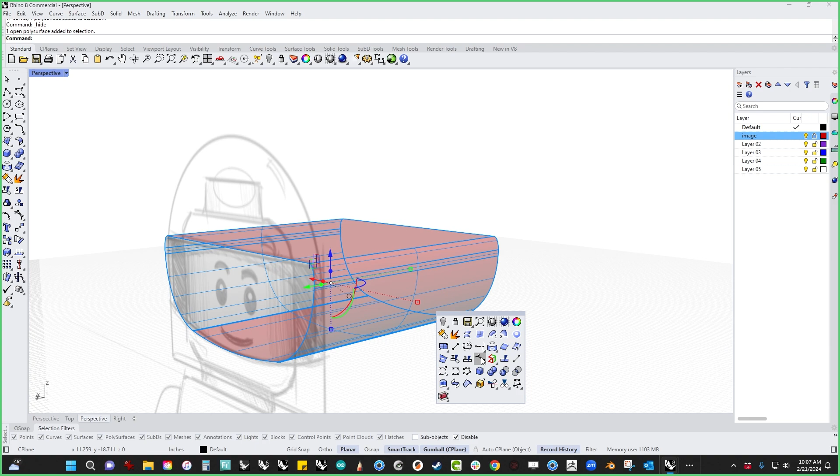Looks like half of my model is inside and half is outside, so let's cap this. Let's flip that guy. Now they're all facing the same direction at least. Join, cap - it says it's unable to cap. It looks like this one's still flipped inside out.

It looks like the reason for that is there's a little mismatch down here, so let's fix that. There we go. It still doesn't like that. All right, I think there's something going on with my original curve. Let's fix the original curve. That's the right thing to do.

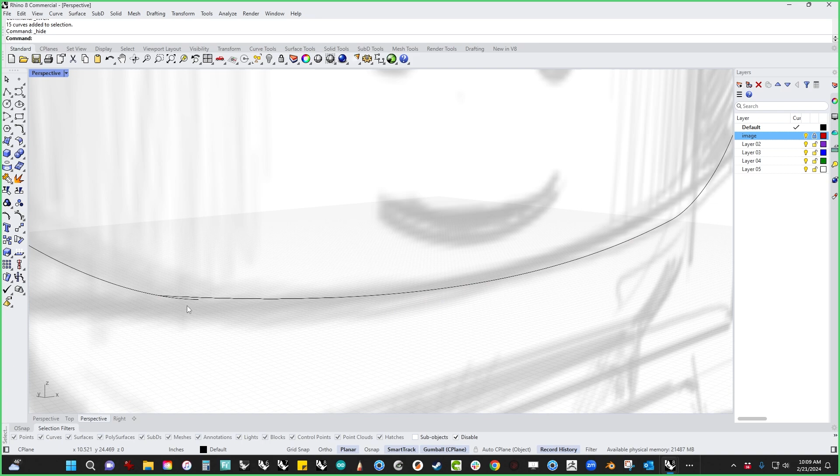You can see where the overlap is right there, so let's fix that. Looks like it works on this side but not on the other side, so I'm going to make my life easy and trim this in half and mirror it. No need to fight with model parts that misbehave.

Why don't you like each other? One open... okay, it's still overlapping. See that? See where the points land there and where the points land there? I make the mistakes so you don't have to.

Let's just curve Boolean it, make our lives easy. There we go - now it's a closed curve, because curve Boolean chases around that outside. So now let's bring our helmet back.

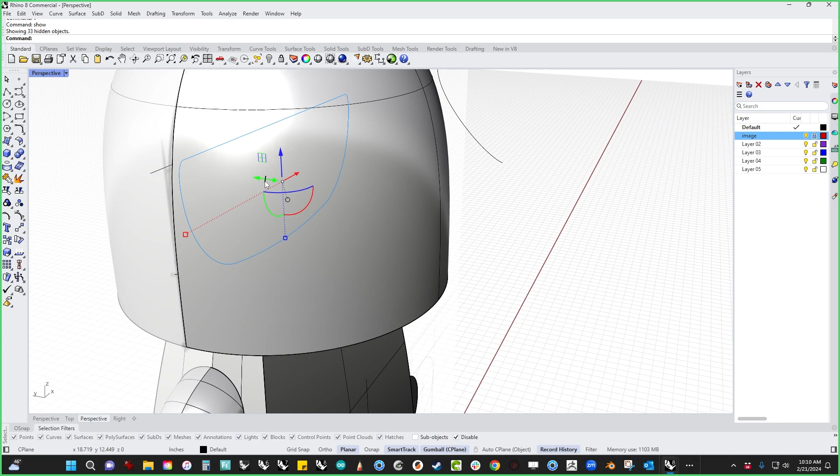And let's see if that cut works. That's the reason the cut didn't work before - oh see, we blew through everything. That's the reason the cut didn't work before, the curve was crap. So if you fix the curve, then all the rest of the stuff will work.

So there's a little helmet. Let's make his little trophy - we can just do that with a spun object. Let's pick a center line. I always draw a center line just because it's easy. And we'll start here.

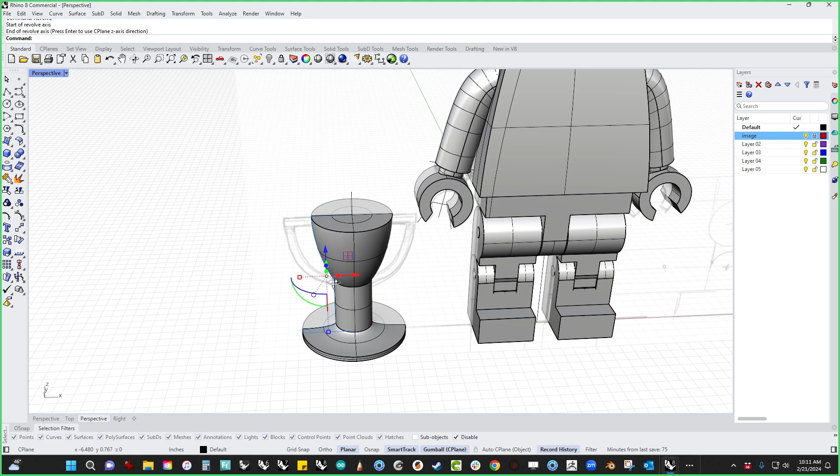All right, let's make that. Revolve surface, revolved surface, rotate it full. Let's make the little arms - I'm going to just do that with a box.

Do it from the center. Center that using gumball and snap. I'm going to set my gumball to be the top, and then snap it to the top of that. And then let's draw our little arms down here.

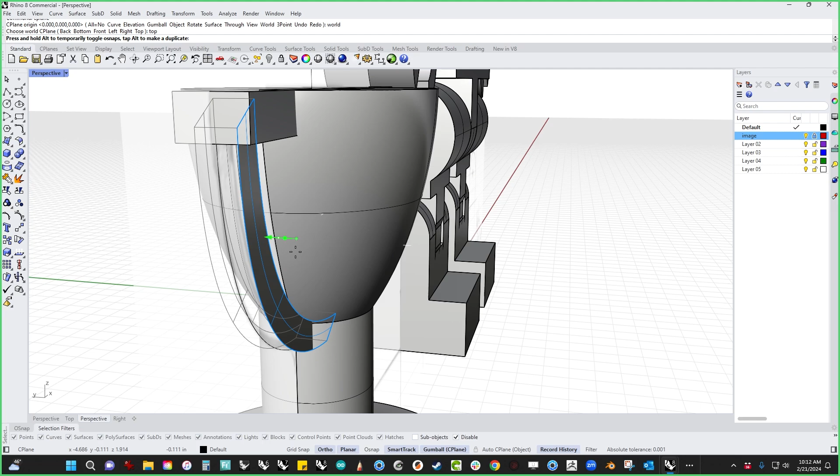One thing I'd love for everybody to start getting used to is using much fewer points in your curves. So what I did right there, if you're wondering, is I picked a curve, went up to the gumball, started dragging it, and held down Control, and that extruded out a surface. That gives me a little surface that I can then shift-drag on the gumball and pull out.

Then I can take this, go to the front view. Oops. Oh, there we go. And then we can just Boolean all of this stuff together.

Now it looks like merge all coplanar faces will help that pull together. And then if I wanted to have this open, I could just extract this surface with a copy, shift-drag to shrink it in a little bit, bring it up so that it sticks out, and then untrim the edges.

All right, and that should be a complete thing. Let's make sure it's all untrimmed. It's not. There is an untrim all up here.

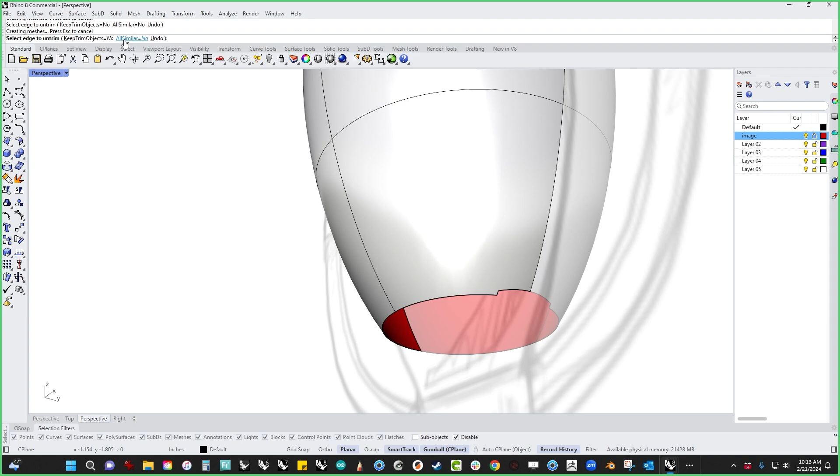I'd cap this and then just scale it to whatever wall thickness I wanted, and then Boolean it out. And it made a copy, so there we go. That's a little trophy, and that's kind of our little dude.

Now, we could go through and assign materials to this. Maybe I'll do that in a different video, but to wrap this up, I would probably go through and do some filleting in here. If I was to print this, this is all pretty much ready to go. We'd have to do the joints, the connections, all that kind of stuff, but essentially this stuff is all ready to go.

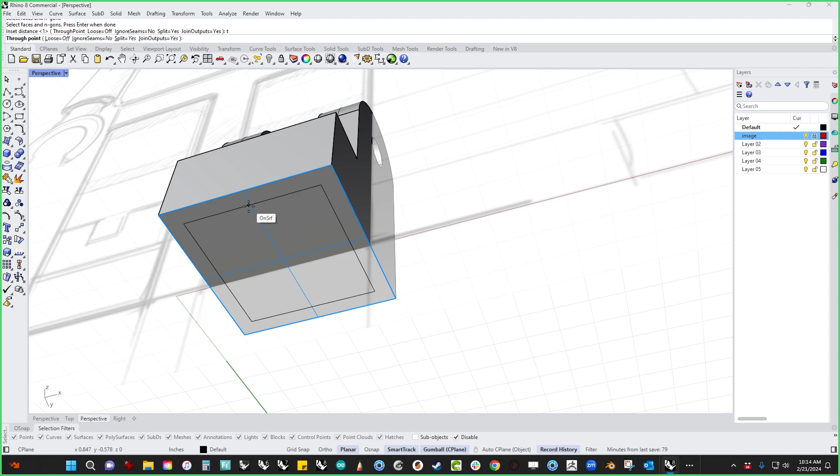If we wanted to make some little additions to the bottom, we could use inset to draw some curves, and I'm going to do this through point. I'm just going to drag a curve on the surface, and then I'm going to use push-pull to just push that in a little bit. And that'll give me that piece.

I was planning on using inset and push-pull more, but it ended up being kind of more of a traditional build. But push-pull and inset are absolutely fantastic little tools.

So if we wanted to give them some little toes, we could inset something like that, and then push-pull, give them some little boots like that.

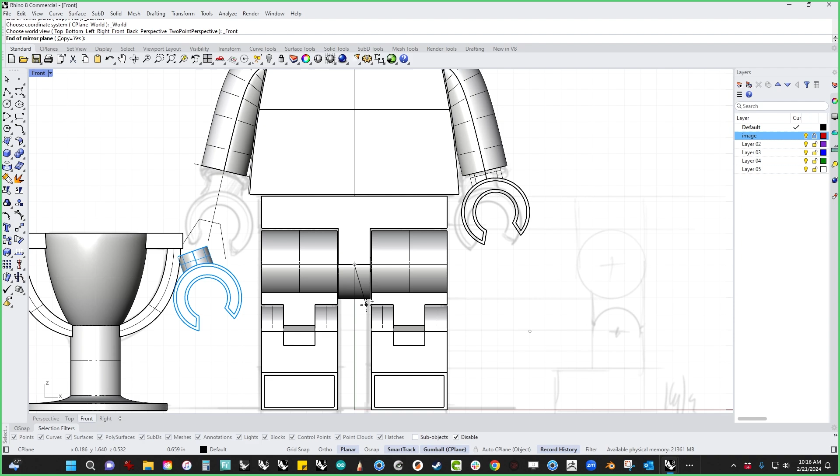We could inset this. We wanted to give them a little bit of detail here. Just a little bit of visual interest. I find that the time I spent in the toy industry, I did a lot of stuff for Mattel, for Hot Wheels. And they used a lot of what they call nurnies and greebles, a lot of little surface details and stuff. Push-pull is like a godsend for that kind of stuff.

So if we wanted to add some details to this thing, we can use inset here to draw kind of what that thing is supposed to look like, and then use push-pull to just add that little bit of surface detailing.

So we'll inset this face, not that one, I use the T key to get the through point, and then we'll just push-pull a little bit of detail in here. Same thing over here. It's going to remember the last setting you use, so if you're doing symmetrical stuff, we can very quickly go through and add some little extra details in there like that.

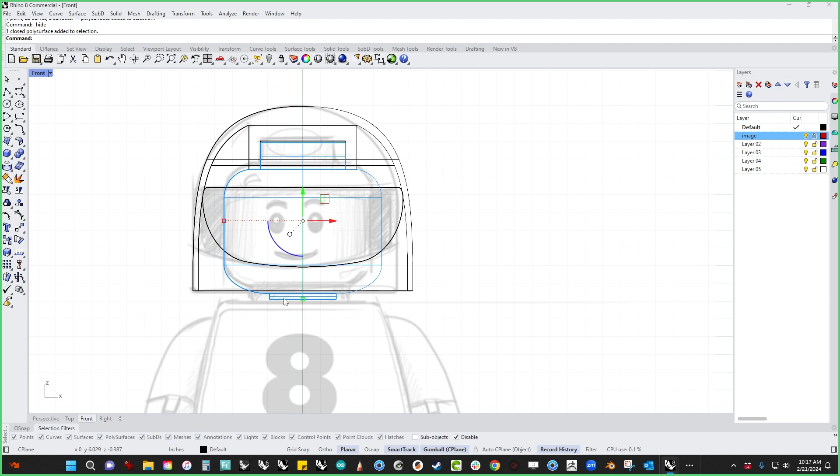All right, and then the very last thing that I'm going to do is I'm just going to add the cuts so that I can assign some materials to the face. So let's just draw a little face on here so he's not completely faceless.

And we'll draw a little circle for a little highlight. And we'll mirror that. Someone didn't draw the face very symmetrically.

Curve Boolean, going to keep just that part.

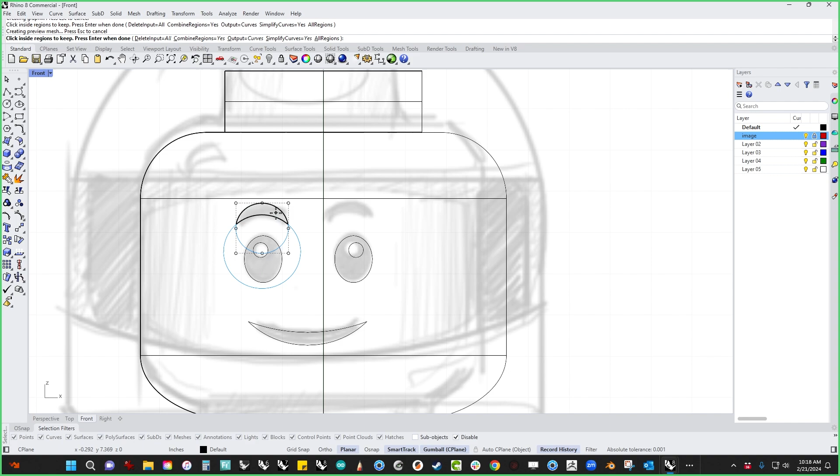Got some crazy fish eyes going on there. We'll make his pupils go in the same direction. And then I'm going to take this and let's just have it mildly centered. So when you pick a bunch of objects, you'll notice that the gumball goes to the bounding box center of those objects. That's super useful.

And then I'm going to pick these curves. I'm going to use the cutter to actually just make those separate pieces. Actually, I don't want to cut those. Let's do a split instead. So let's make surfaces out of those. And then let's do a Boolean split.

And then we've got separate objects that we can then assign materials to. We'll just throw, I'm not going to get crazy into rendering this thing, but let's just at least give him a little bit of identity.

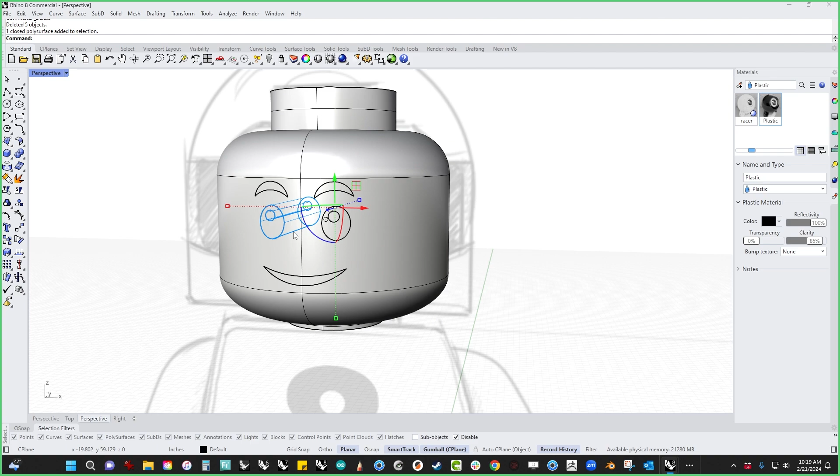And then we'll make one more for the highlights. All right, good enough. Throw a couple little materials in here just to make them a little bit more interesting.

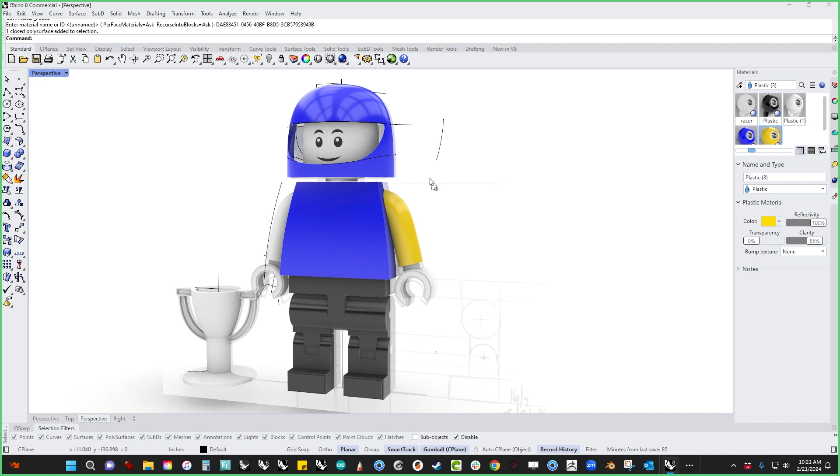Maybe he's got yellow arms or something. And we'll throw a metal on the trophy.

And we'll hide the image. Hide the curves. Get rid of that point. And then we can just do a little ray trace on it.

Race car. Any questions on any of that? Awesome. All right. I'll let you go.

Thank you for joining. We got in. Do you come with a slowdown knob?

Yeah, you can go on to YouTube and play it at half speed if you want to hear what nightmares sound like. But yeah, you can actually play it slower on YouTube if you want.